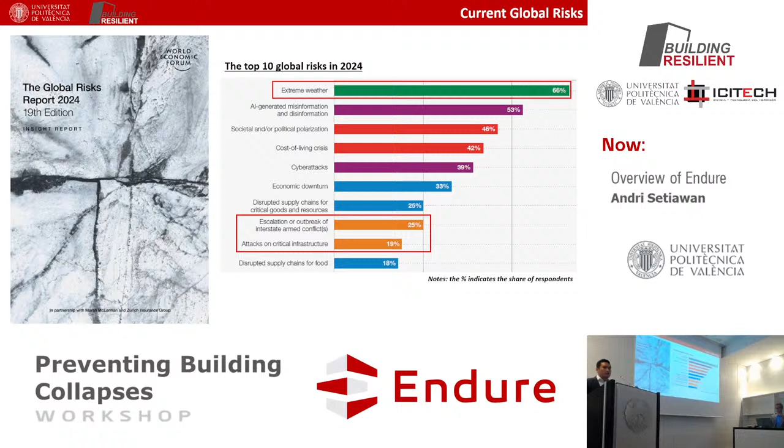So what I want to highlight is that when we speak about threat or hazards, it's just one side of the coin. The other side, which we usually overlook, is vulnerability. And this is mostly something we can do something about as engineers and researchers.

I usually don't pay much attention to media or news because sometimes they are misleading or a bit biased. But I want to show you two headlines that I fully agree with.

This one is from Huffington Post, written in 2016. It says that natural disasters cause way more deaths in poor countries than rich ones. This indicates that vulnerabilities play a crucial role.

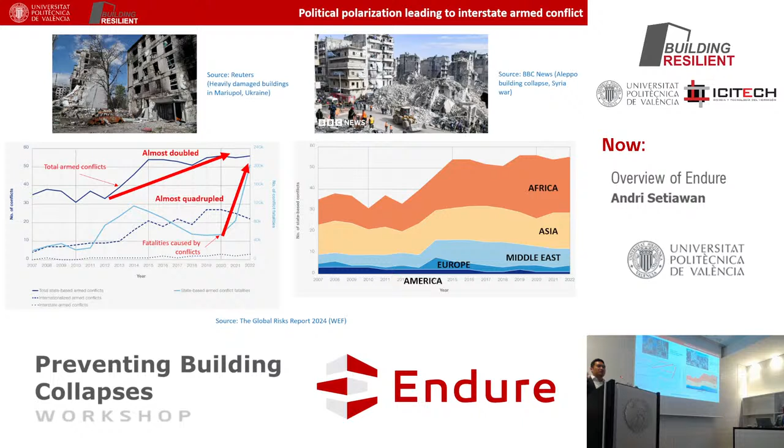There are many issues with aging infrastructure that may lead to building collapse as well, including reinforcement corrosion and also cracking and spalling of concrete, which we need to take into account in our problem.

Now I'm going to move on to speak in more technical terms about building collapses, some events that happened in the past, and what we can learn from them.

Starting from Ronan Point apartment, I think this is the most important event in robustness design, happening in 1968 in the UK. There was a blast on the 18th floor of the building that caused the partial collapse of the whole corner bay of the apartment building. This was the first event that triggered the development of official formulation of robustness building codes.

Then followed by another big incident, unfortunately in Seoul: the Sampoong department store collapsed, causing more than 500 casualties and injuring more than 1,000 people. Until today, Sampoong department store is still the deadliest non-war-related disaster in South Korea, and also the second deadliest in the world after the Rana Plaza collapse.

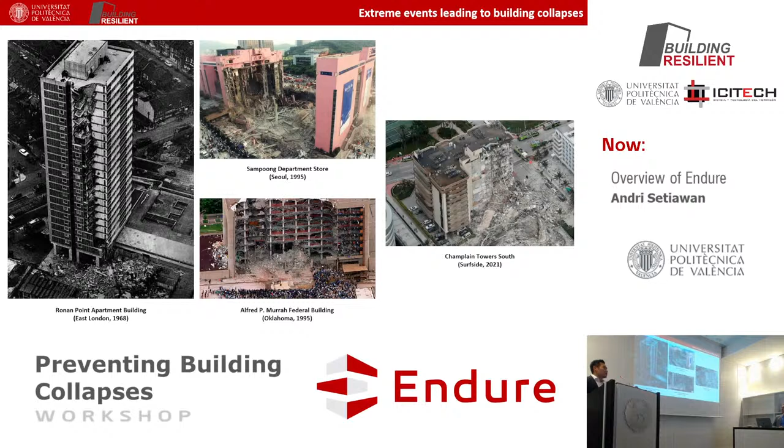So after seeing this collapse, we are going to discuss in more detail about what happened to this building. And I think the best way to do it is to describe what is progressive collapse.

There are many different definitions of progressive collapse, but I'm selecting one today, which is from the GSA. It says that progressive collapse is a situation where a local failure of a primary component leads to the collapse of adjoining members, which in turn leads to more collapse. And then the total damage is disproportionate when compared to the origin.

There are three keywords that I want to highlight, which I think emphasize what progressive collapse is. First is that most progressive collapse happens due to local failure. This local failure can be triggered by many different things, such as explosion, fire, or vehicle collision.

This local failure leads to the propagation of additional collapse in the surrounding system, leading to what we usually call a chain reaction or a domino effect. And the resulting collapse is disproportionate when compared to its origin.

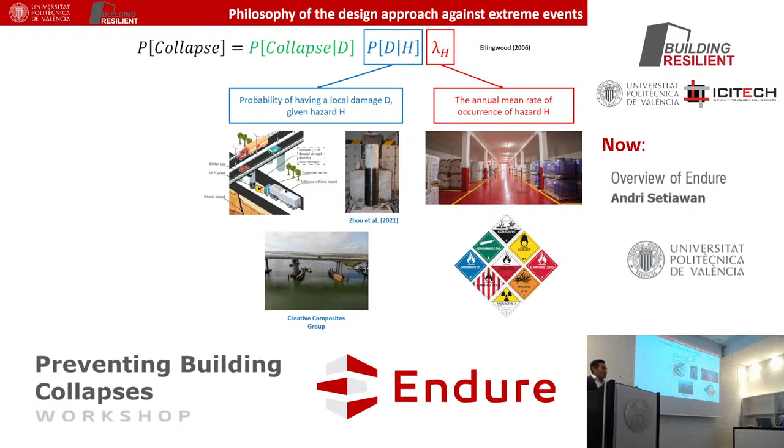But then, if this local damage happens and we cannot prevent it, we move on to the last component, which is the propagation of collapse - the probability of having this disproportional collapse given the local damage happens. For this, we mostly rely on the redistribution of the system, how different alternative load paths can be developed to redistribute the loads from the failed components to the surrounding system, so that we can achieve a new equilibrium without having partial collapse.

So this philosophy is applied to building codes. And how do we apply this? Let's see first by the evolution of codes.

The first official codes of practice were written in 1972, just 4 years after the Ronan Point collapse. This code has been developed, adopted, and modified into many different codes all around the world - Eurocode, GSA, and UFC in the US, and also the most recent one, ASCE 76. And we are also expecting the second generation of Eurocodes; I think it will be published in 2025.

If we extract the main essence of all these codes on how to deal with design for robustness, we have three main approaches.

First is the key elements. This one deals with prevention or minimizing the local damage. So we can have a column that is bigger or stronger, or putting FRP or jacketing, basically to make sure that if some hazard happens, our main critical components, mainly the vertical load-bearing elements, can still survive this hazard.

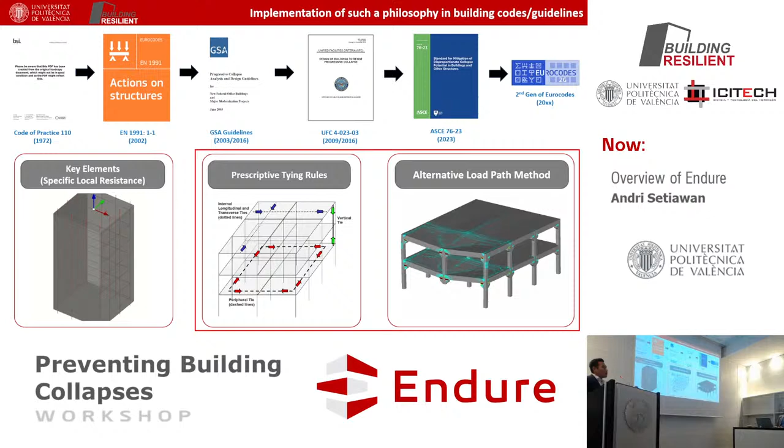But then, when can continuity actually backfire? There are some scenarios that show this. The first one is if you have a local foundation settlement, for example, if you have an elongated building and there is a significant settlement only in one small area in the building, continuity can actually pull the rest of the system that was previously unaffected.

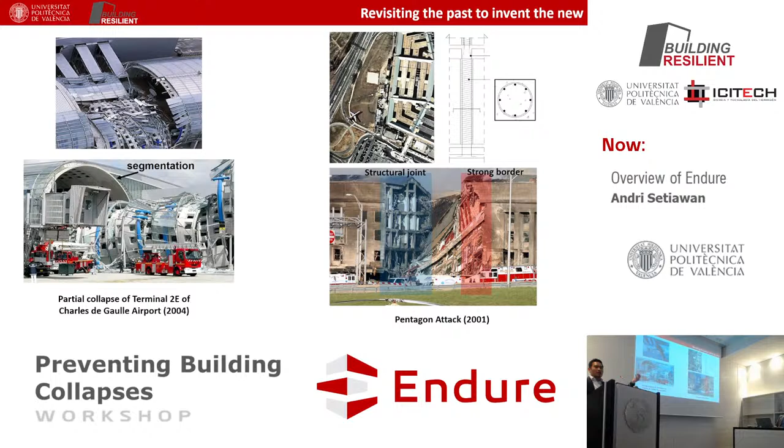So what we are trying to do in Endure is to invent a new philosophy where we combine the positive advantages of two main extremes: combining segmentation and combining continuity.

Why is this relevant? Because the way we design fuse-based segmentation, combining continuity and segmentation, is actually very similar to the way a lizard escapes predators.

There was a recent interesting study written in Science by Baban et al. They did a microscopic scan of the lizard tail, and instead of a single monolithic unit as we might think, the lizard tail is actually composed of segmented fracture planes that are deliberately designed to break.

So our fuse-based segmentation that we will apply in our buildings adopts a similar concept. We will have continuity, we will have the tail when there is no predator, no threat, and this will help ensure the building can function properly during service.

And if you have a small initial failure, we have continuity to deal with the distribution. But if there is a failure too large to withstand or contain through continuity, it will segment, isolating the collapse so it doesn't spread to the rest of the system. With this, we have what is called fuse-based segmentation, or scenario-based segmentation — we only form segmentation when it's needed.

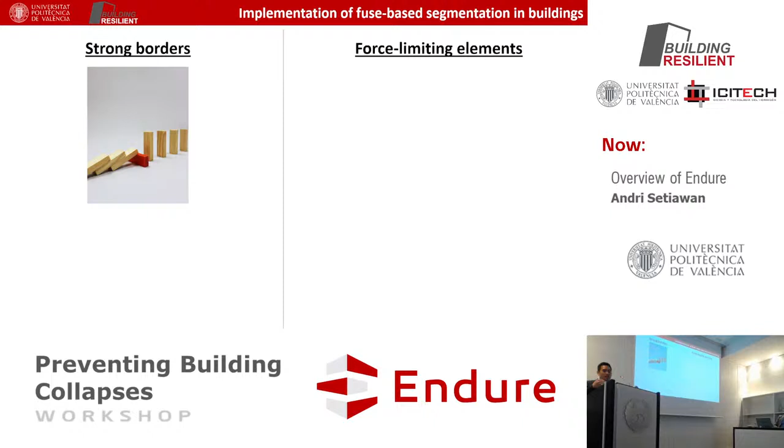Strong border is probably the most straightforward one. We've seen how it works perfectly during the Pentagon attack. You can see the illustration here: when the collapse front propagates, we have strong elements, indicated by this red block, that withstand the collapse front so it doesn't propagate to the rest of the system.

How do we do this in a real building? This can be done with even conventional columns designed with a seismic requirement, like a special moment frame with ductility class high. Or we can take advantage of a core wall or shear wall in our system — instead of just using these walls to resist wind or earthquake, we can position them to segment the building if needed.

There are several methods that have been used for seismic design, but we found they also work relatively well for collapse. For example, in steel construction we have what's called a dog bone, or reduced beam section, where we cut the flange so we don't transfer high moment to the column.

This also helps during collapse, because the column survives better if there's no significant transfer of force from the beam. In concrete structures it's a bit more difficult to achieve, but we can have a plastic hinge relocation with special detailing — for example, protecting the joint from strain penetration happening at the plastic hinge.

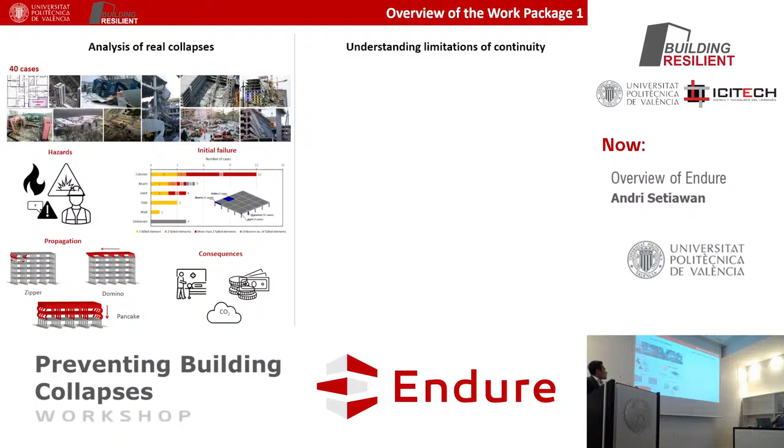From this analysis of real collapses, we develop several hypothetical building designs, taking understanding of when continuity can actually backfire, and investigate in more detail with different building configurations, different spans, different heights, and different initial damage scenarios to see when continuity can be ineffective. Because when continuity is ineffective, it means the building needs to be segmented.

So based on the analysis, we do the fuse-based segmentation configuration - basically we deal with the framework. The first question we ask in the design is whether this building needs segmentation or not, whether the building can be benefited from having segmentation.

If the answer is yes, then there is more framework we need to incorporate in the design process to determine where and when, and how we should segment the building, what would be the ideal or optimum segment size to contain the collapse effectively. The last step in work package 1, based on this framework, is to demonstrate the benefits of having segmentation compared to a building without segmentation.

Of course we have different collapse areas for the same initial failure, and we can quantify the consequences of these two scenarios so that we can convince stakeholders, building owners, and end users that having segmentation can save lives and save the monetary value of properties as well.

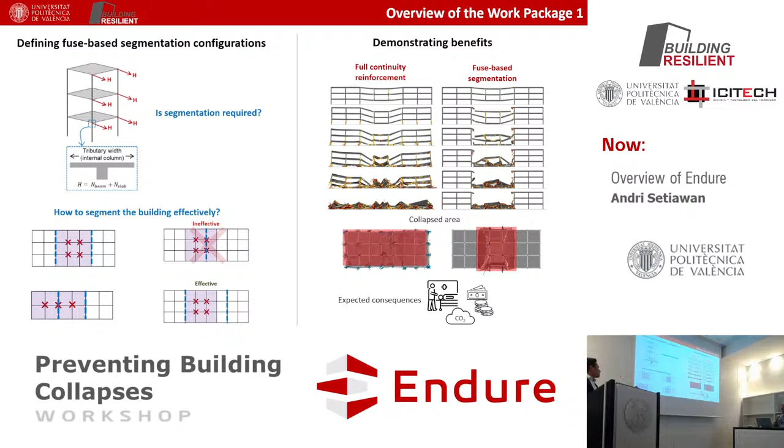And then in work package 2, there are two main activities we are currently working on. The first is designing the force limiting elements and doing some prototype testing to see how reliable they are and whether they can be manufactured precisely. To do this, we try not to reinvent the wheel - we try to adopt what's already in the industry and then make adjustments and modifications.

So in order to do that, we develop a multi-criteria analysis with 9 parameters covering different aspects that we consider, for example the reliability of the fuse, how durable the structural fuse is, and how compliant this fuse is to other load paths in the building, and so on.

Using these criteria, our team evaluated 26 potential fuse designs for reinforced concrete structures and another 22 for steel structures. These are just some examples we gathered from the literature. We can have precast connection systems, mechanical couplers, or pin connection systems that are quite common in steel construction, and also additional corrugated plates or reduced beam sections, for example.

For the reinforced concrete structures, according to this multi-criteria analysis that we performed, we evaluated mechanical coupler as the most, let's say, practical solution that we can achieve.

The interesting thing here is we want to do the opposite of what traditional coupler does. Traditional coupler is always designed to be stronger than the two bars connected to it. But since we want this mechanical coupler to behave like a fuse, we need to design it to be weaker, but not too weak so that it breaks under small failure, but not too strong so that it will propagate the collapse.

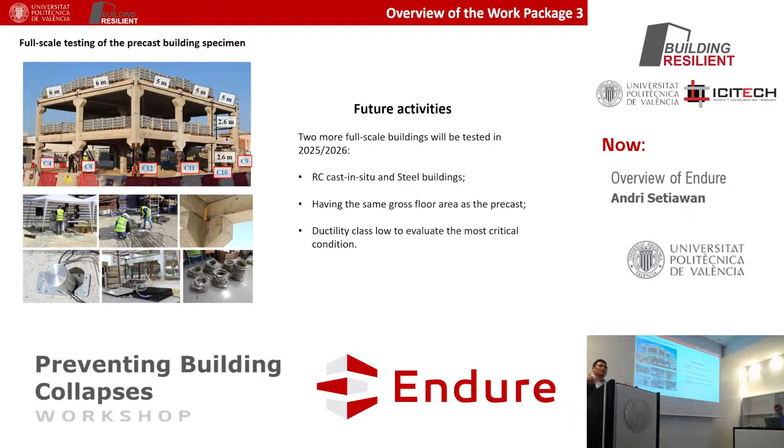Since the project is not yet finished, I will not make any conclusions or statements about it. I'm going to highlight the impacts that Endure can bring from its success. Scientifically, the success of Endure will open a new paradigm for next-gen robustness design. By no means to eliminate or substitute what has been done in the past, for example continuity, but the goal is to complement it, to provide the last line of defense in the building if other measures fail to do so.

Socially, this is the biggest goal of our project: to create a more resilient society, more resilient buildings, and to save lives from future collapse. And environmentally, with more robust buildings we can expect longer service life, which can help reduce carbon footprint, a big issue for our planet Earth.

So I'm going back to the first message that I was telling you: our world is at risk. This is probably inevitable, but we can create a resilient society so that hazards don't necessarily translate into disasters. Thank you very much for your attention, and I hope you enjoy the rest of the workshop. Thank you.

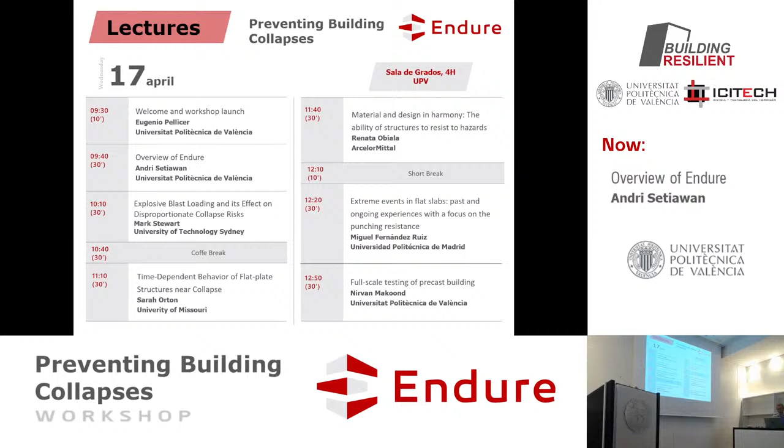Ready for the presentation? Yep. And thank you very much for coming to Valencia. 42 hours traveling by plane. Yeah, so truly appreciate your visit.

Okay, well I really have to thank Jose for getting me involved in this very fascinating project. We just heard from Andri about the scope and how innovative I think this is. I also have to thank Jose and his team for being such gracious hosts while I'm here. You've really shown me some good parts of Valencia. I'm looking forward to seeing some more. I'm really enjoying my time here. So thanks, Jose. How do I move?

Okay, so Andri actually gave a pretty good introduction to risk and risk assessment, which is really my interest. In the last 20 years or so I've been very interested in explosive blast loading and terrorism. But what I want to talk about today, the principles, methods, and philosophy, can be equally applied to seismic actions in terms of progressive collapse or other types of abnormal loading.

So the motivation for me is about risk, and obviously as engineers we like to think about numbers rather than just adjectives. Risk occurs in the spectrum between full certainty and complete uncertainty, so risk lies somewhere in the middle. It's really about the likelihood of the hazard or threat as a product of the vulnerability of the infrastructure we're looking at, and then the consequences, in terms of lives lost, economic losses, or other social or indirect losses on top of that.

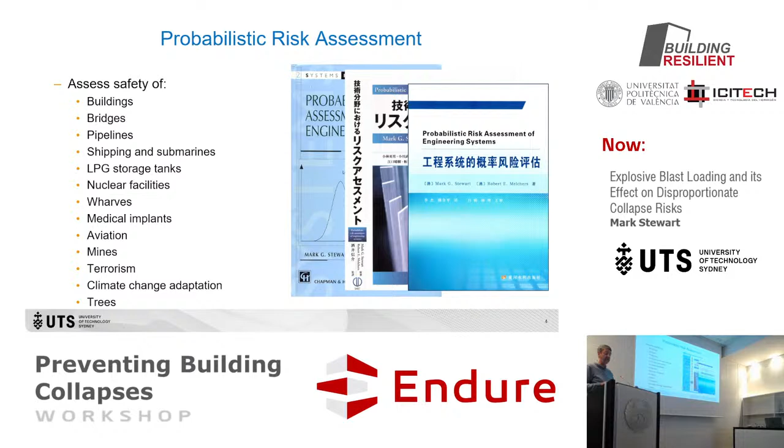And it's really about low probability, high consequence events. So it's really extreme events, right? And that's where decision making is really difficult to tease out. Just what's the best thing to do?

So we'll talk about terrorism, and most of you know what's going on. I'm really interested in some improvised explosive devices that can be homemade, at least in Western countries. We're lucky that most of the attacks in the West are lone wolves or self-starters, so most of them don't actually succeed - it's quite rare to have a successful car bomb or IED attack in the West. I've been mainly focused on vehicle attacks because several tons of explosives is what's going to really damage buildings and other infrastructure. But there's other threats.

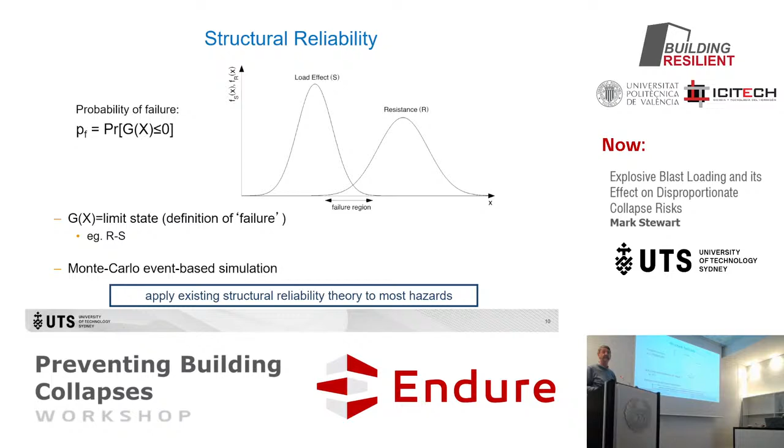Extensive glazing damage. And what we really focus on is the loading side, the air blast variability, and also the structural response side. So you need to look at both sides of the equation here.

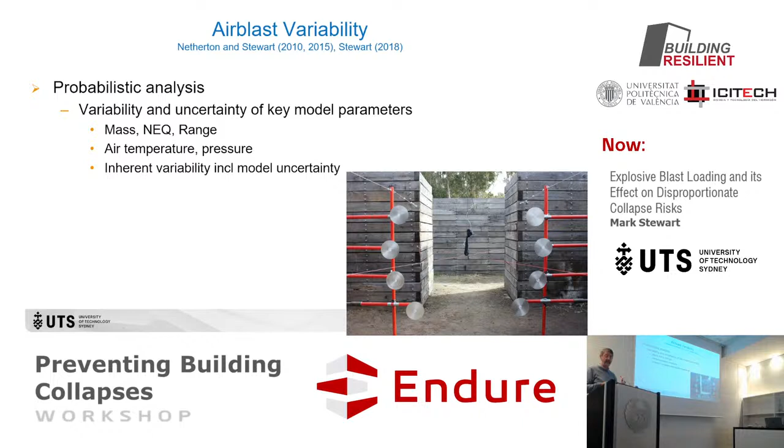Now, theoretically, you should get exactly the same pressure at every gauge. But we don't, right? We see that there's some variability. And so we did more than 90 tests over several years. That's sort of what we get. It's fairly small scale within a bunker.

And triggers for collapse - I already talked about the innovation for that, so I don't need to talk too much about that.

This is a sort of illustrative example. It's a little bit realistic, but not that realistic, in the sense that it's just something we can do in like 6 months. We said, okay, let's look at a reinforced concrete building. Let's assume it's 10 stories high. Let's say the footprint is really just 5 columns across. We're only considering the axial load of the column as the main failing mechanism. We haven't modeled this as a structural system - we just modeled this as a column with a load on it.

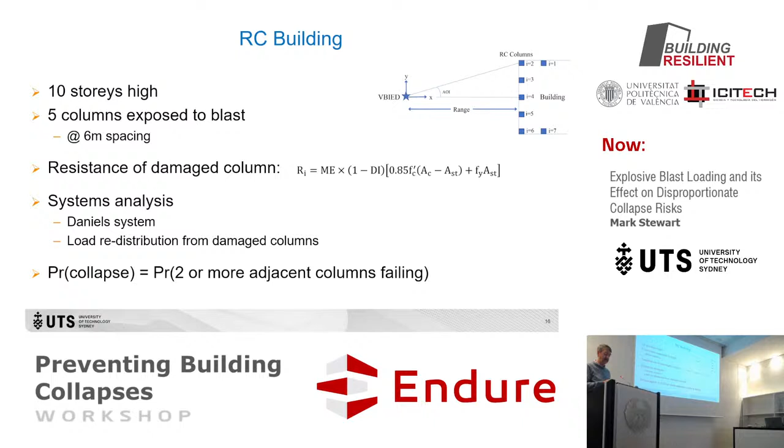And there's uncertainties, right? So you might have 1,000 kilograms of ANFO, ammonium nitrate fuel oil, which can be homemade and mixed. Let's assume it's 1,000 kilograms. Let's assume that when the terrorists make it, they might aim for 1,000 kilograms, but it might actually be a bit less - maybe 950 or maybe 1,050. So there's some variability in that, which we call the coefficient of variation, the standard deviation divided by the mean.

So that uncertainty is quite narrow. Bigger uncertainty is how you mix it. ANFO has to be mixed really carefully to get the full energetic property. If it's mixed perfectly, it's going to be equivalent of about 0.8 compared to TNT - so 80% of the charge or effect of TNT. TNT is always seen as the reference here. But if it's made poorly, it can have 0 TNT equivalent - it's just a dud, a fizzer.

One example was the so-called Times Square bomb.

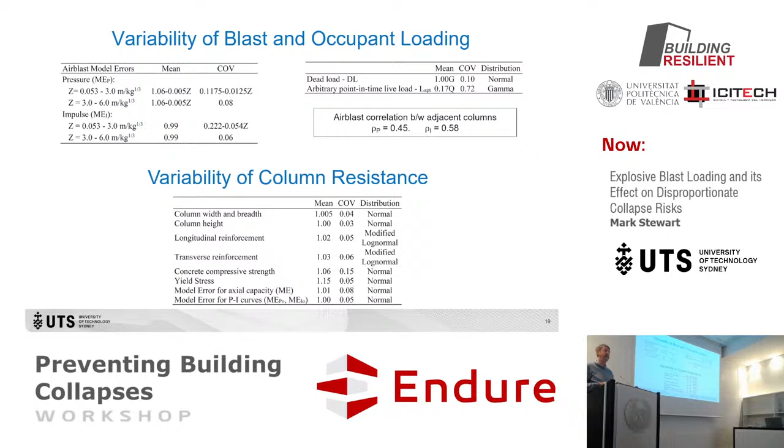So this is a case where the design values for loadings for blast tend to be not conservative, because they're really scenario based. For natural hazards - live loads, wind, seismic, snow, and everything else - the design code loads are normally conservative. But the main thing here is that there's a large variability in our loading side of the problem, as well as on the resistance side.

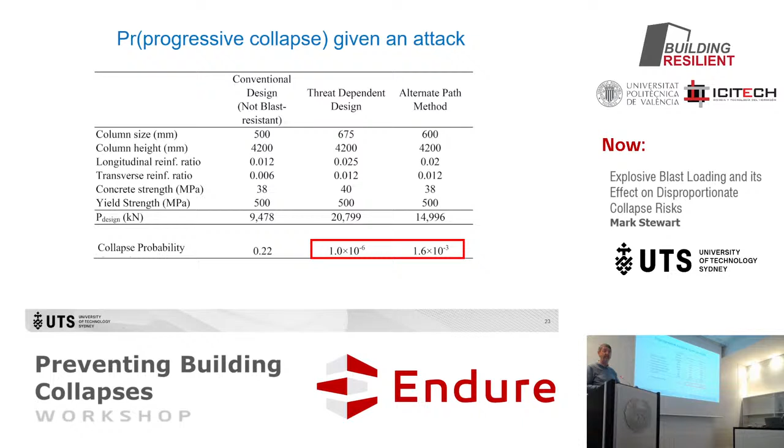If you design for it to be blast resistant, then the probabilities become very, very low, which is what you would hope to see. So the risk reduction is greater than 99%. Blast resistant design is very effective. You're getting nearly 100% reduction in risk. But there's a cost because you need to have much larger structural members.

In most cases you think, well, these numbers are pretty low. This is assuming that you do have an attack, and the attack itself is going to be relatively unlikely. So then the question is, well, these numbers are great, what can they tell us? How do we balance risk versus cost?

And the key question is, what's the likelihood of a terrorist attack occurring on that particular building? And the key question is, are these risks acceptable? Are these something we can live with, or are they things we need to actually mitigate?

So the question is, how safe are we? This is a fairly simple approach, but it illustrates the point. We can assume that the probability of the hazard, the probability that there's a successful attack, might be 1 by 10 to the -4.

And that's per building per year. So you might think there could be an attack somewhere in your country, but to think about exactly which building that is going to be becomes a very low number because there are so many targets. So it depends on what threat advice you are receiving.

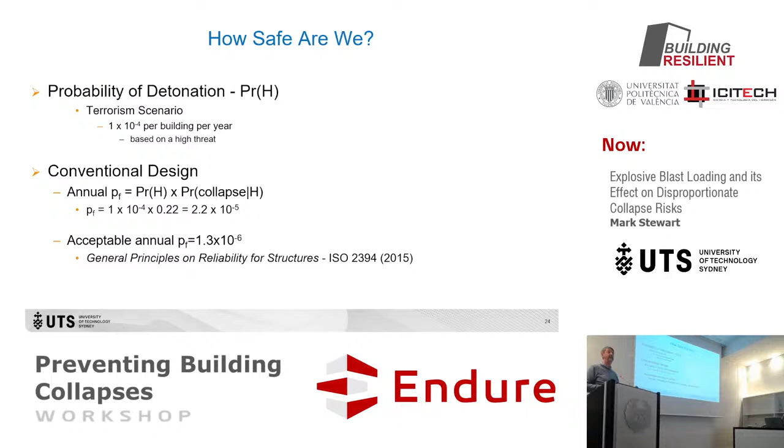So in this example, you'd say, well, actually the conventional design is unsafe. The probability of failure is pretty low, but it doesn't meet the target reliability. And that's the basis for performance-based design, to make sure reliability matches a target or actually exceeds our target.

But obviously, you can do a lot more detail in the analysis. It just shows the information we need to work out whether the risks are acceptable and how safe we are.

And so if you want, you can then go on and do a cost benefit analysis, because at the end of the day, most decisions are made by either government or by owners of infrastructure, and cost is really important to them. They need to see that what they're doing is cost effective.

That reduction in risk gives us our benefit. Let's say we reduce the risk by 99%. That means the benefit is really that we're saving in terms of lives lost—those lives lost will be reduced by 99%, and the damages will be reduced by 99%. So that's the benefit, and you compare that with the cost. Now, obviously, in reality, it's a lot more complicated, with time effects, spatial effects, discounting and so on, but these are the basic principles.

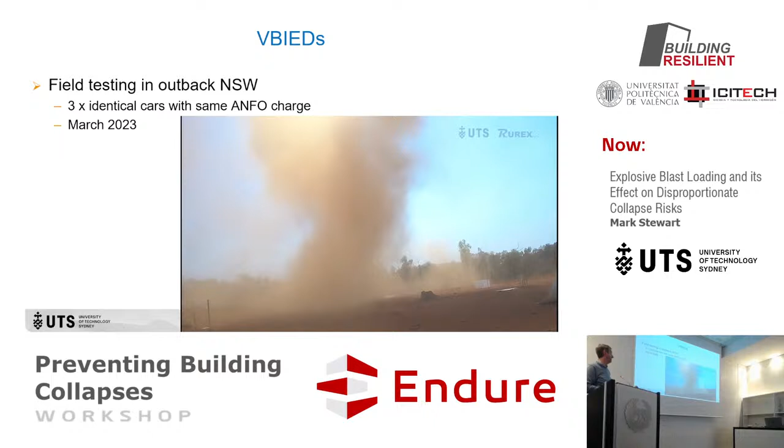We did this in the outback, 800 kilometres from Sydney. The town we stayed at had 12 people—a little village with a pub. We got to meet all the locals. While we were there, there was a bushfire, and we lost power for a couple of days. I almost hit a kangaroo on the road. It was a pretty adventurous week.

You can see the range here—I always like this tire, it just goes flying up there. Even though this was in March, it was really hot, like 40-degree, 45-degree days every day. And you can see that it's quite impressive that the facility is so close, about 30 or 40 kilometres away.

Because it was in such a remote location, we had to take 5 tons of equipment with us—2 cars, 2 trailers. You're 150 kilometres from the nearest decent-sized town, so if you don't have it on the day, you just can't get it. We're still analysing the data. To give you a sense of distance, that's about 350 metres across, and some fragments ended up over here, 400 or 500 metres away.

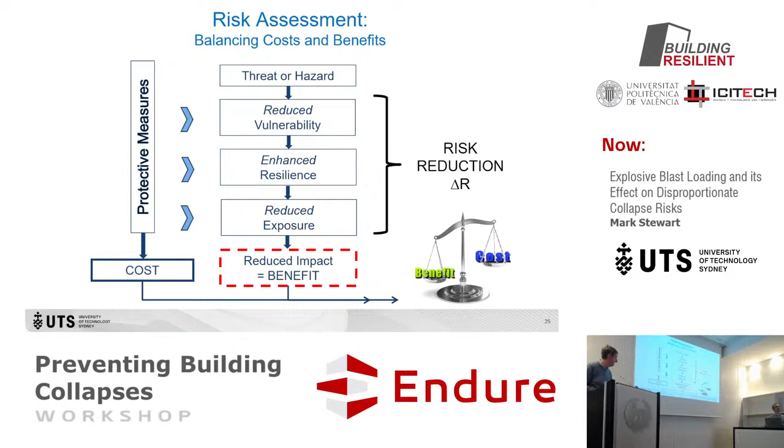Very interesting—I'm not at all an expert in terrorist attacks, so I got a question. I think it was in slide 24. Just curiosity, before just some... yeah, here.

Here we're speaking of an acceptable annual probability figure of something to the power -6, but I don't know if this is related also to terrorist attack. Normally we're speaking about 10 to the power -4 as a general value. So when I was seeing the figures, I was thinking it's difficult to say a conventional design is unsafe, really, because in the terrorism scenario you introduced the probability, perhaps you could also say what is safe and then inform the owner what probability you can manage for a terrorist attack.

So to do it inverse, to say okay, you could have 1 bomb you can spend every 3 years - is this acceptable for you or not? Instead of saying this is not compliant. We have a very difficult number to calculate the probability of detonation. I don't know if you had thoughts on that.

Yeah, no, I fully agree. I just do this as a very simple equation. I'm going to do this for industry, or I could hold an hour talking about this. But yeah, you're dead right. That's why I said it depends on the threat scenario. It depends on - I didn't show the table, but ISO 2394 has a table with consequences versus the cost of safety measures, and you can see where you think you are on that table. So here I chose catastrophic consequences, which raises the bar much higher.

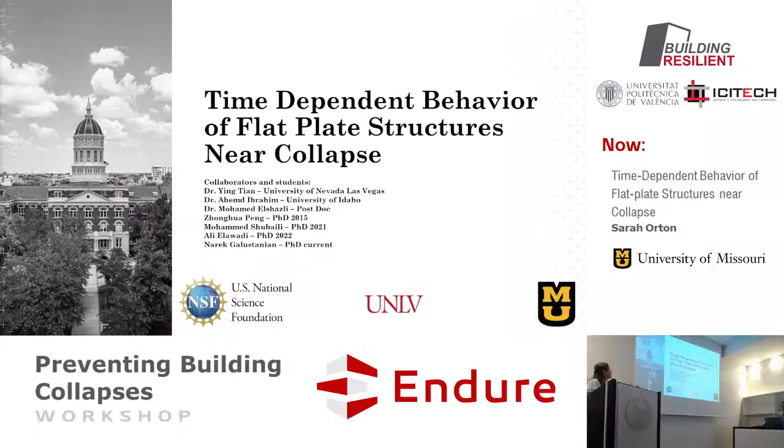There we go. So I'm actually presenting three projects. One started back in 2012, dynamic response of flat plate structures - I'm just going to give a very brief overview of that. I'll spend most of my time looking at time-dependent response under sustained loading, so you load it up and then see what happens. And then this last one, which I just got funded earlier this year, is the impact of falling structural debris. So far that's my talk here. For the dynamic response of flat plate structures, I tested 0.4 scale structures under sudden column removal.

So you can see the idea with the structure here. We have a little segment cut out, and this is the structure. It's about 20 feet, which I'm not good at converting to meters, but it's big - about the width of this room. And then the columns, I have 9 columns throughout here that we then tested.

Not going into a lot of details on this, there's papers about it, so you can watch the papers, but you can't watch videos in papers, so I brought videos. We did 2 different column removals. This one was the exterior column removal, so we're removing this column right here. There's a little jack that's going to collapse, and it will drop. The applied load was about 10 kilonewtons per meter squared. The intact capacity, if you had the column, would be about 22. So you're about half of what the building would be able to withstand if it was fully intact.

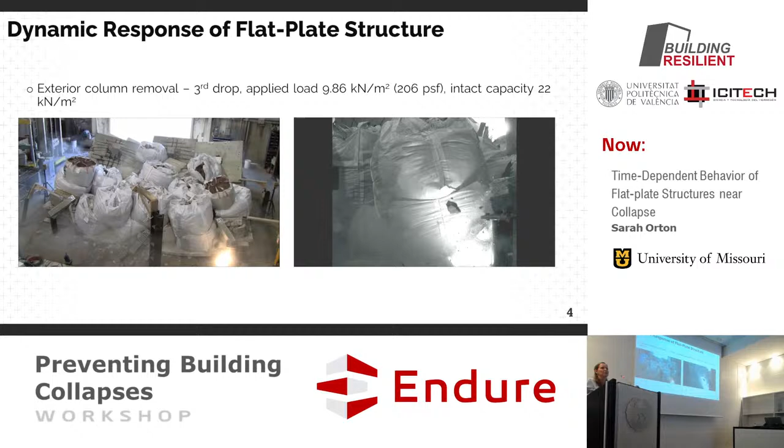And of course, that's what it looked like after we moved all of our extra weight. Very common punching shear failure. And Dwayne talked about this in department stores - the idea of these columns sticking up and they're just kind of left there and then they fall over on top. Very common. Did another test, completely different structure.

This one, we're removing the interior column, this one right here. So here is the slab, there's weight on it. This frame out here is just to hold a string pot going to the middle. And these other beams is the other researcher doing tests that put it in a way so we didn't get a good video. But watch this video.

I had them all timed at the same time almost. So this deflected and the neighboring columns punched. The columns that were to the side, front and back, they all experienced punching shear failure. But the after-punching response, the post-punching capacity, was enough to stop the complete collapse. I think if I had just a little more weight, it would have gone completely through. A little bit less, I wouldn't have had punching failures. So it's like this little sweet spot right there.

This load was only 5.5 kilonewtons per meter squared, which corresponds approximately to 1 times dead load plus 0.5 live load. And as Mark said in most of his presentation, the live load is actually a lot less than what you designed for. So maybe it would have survived if it was a real structure, maybe not.

So overall conclusions here: for the exterior column collapse, you had to have about 40% - the strength was about 40% of the intact capacity. For the interior, a little bit more controlling there, 34% of the intact capacity. We also found that the dynamic amplification factor was about 1.15.

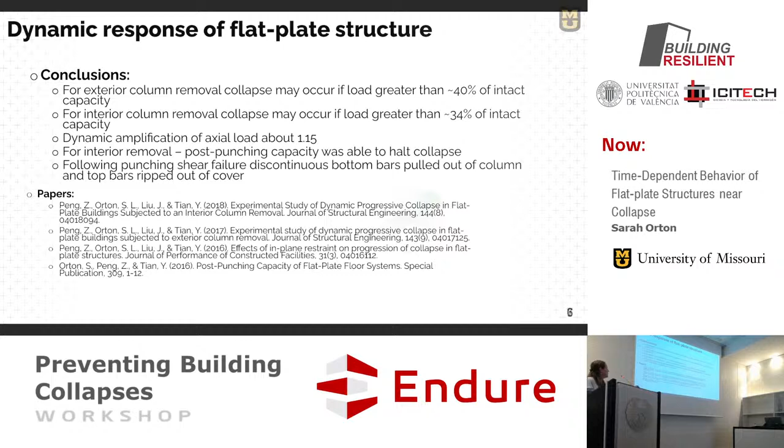Like I said, I was going to introduce this only briefly. There are several papers about it, so if you want to read more, you can always read the papers. The next project I'll go into more detail on is the time-dependent collapse behavior of flat plate structures.

This is a project I just finished about 2 years ago. I'm still writing the last couple papers about it, so it's similar in publication status. It involved this idea that if you have a structure under some sort of sustained load, just sitting out there under gravity load, and there's some damage in it—deterioration, somebody didn't design it right, whatever the cause—how does a sustained load affect the capacity of that structure?

So we started out with some concrete material tests. We did some bond tests, did some modeling, and tests of slab column connections, and then a couple system level behavior models. I'll start out with concrete material.

Concrete experiences creep. Under sustained load, you can define essentially 3 stages of creep: one in which the rate of strain decreases, the primary creep; another in which it's almost constant; and a third in which it can have a sudden increase until failure. Most concrete materials—some sources say 80%, some say 70%—if you load it up to a high level and leave it there, the concrete will fail over time.

A lot of this research was done very early by Rusch, and then our colleague here, Manuel, did some very nice work with his group recently, which we took and realized worked very nicely. So I didn't have to reconstruct anything.

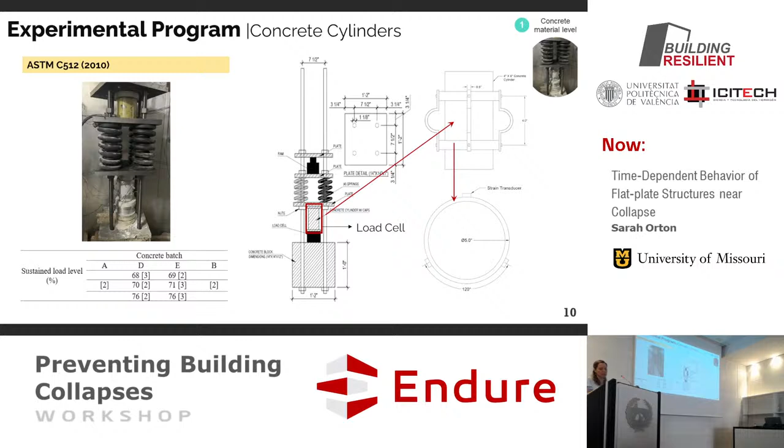So we did some of our own compression tests. There's a cylinder in here, we put on some strain gauges to amplify the strain, put it under some nice big thick springs to create a sustained load, and ran the tests.

For our cylinders, what we saw is if we had a sustained load greater than about 71%, we reached failure. These were the same concrete I was using in my test structure—a scaled concrete, so the aggregate size is about half the normal aggregate size, and that may be why it was a little bit less.

You can see this test here at 68% didn't reach failure. This one at 70% didn't reach failure. This one at 76% reached failure. And this one at 71% reached failure.

So knowing the concrete material, the other question was, what about the bond? Reinforcement relies on the bond to the concrete in order to share the load. So is that going to affect the behavior?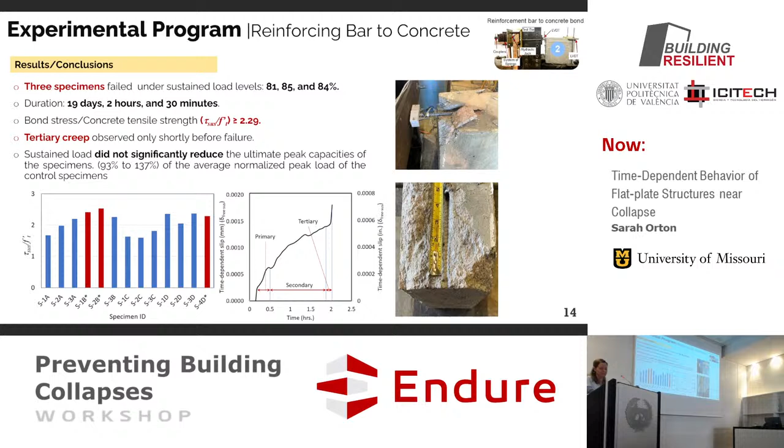So sustained failure level occurring around 81%. Another thing that's interesting is the additional free end slip was about 124% of the initial slip. So you load it and it moves some, and then over time it moves that much again and a little bit more.

So that is part of what causes increasing deflection in our reinforced concrete structures, a slip between the reinforcement and the concrete through the bond. With all that information, we can do some material modeling.

We developed a user-defined material in ANSYS, and my PhD student developed it. I was mostly out of it at that stage. We did 4 different stages, looked at the smeared concrete model, and looked at viscoelastic behavior under sustained loads.

To do the nonlinear creep strain effect, we used previous research, and it worked out really well. For our bond model, we based it on some previous research and then applied it to our own data, did some failure criterion, applied a hardening rule, and applied a plastic flow rule.

For the bond model, we took some existing bond models, looked at our data, and were able to fit an equation. These coefficients, 4.85 and 7.41, came from the best fit from our equation, and that allowed us to predict the bond slip.

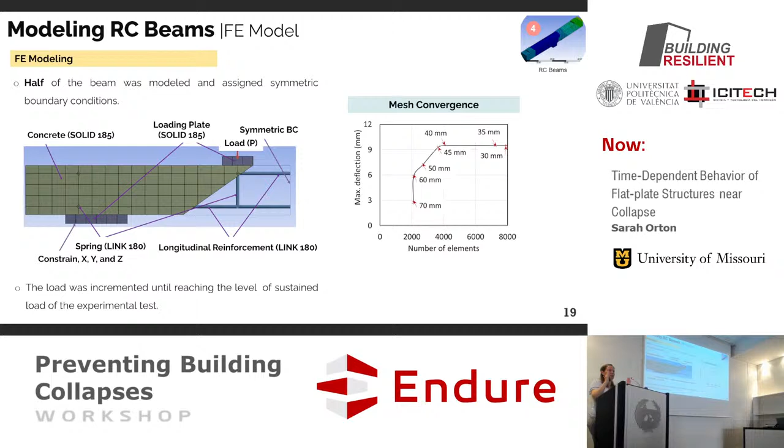So we did models of some reinforced concrete beams. I'm not showing those tests here, but I have a paper out about the beam tests, about 4-foot long beams, roughly that cross section. We modeled those beams, compared it to the experimental data, and the differences are fairly acceptable for this type of work, especially under sustained load.

Then we also looked at the strain and the time to failure, and got pretty decent results.

One thing I thought was interesting: we looked at a particular test where one model considered the bond model, and another model here didn't apply the bond slip effect. You can see a very different increase in the creep deflections with time. So just applying that slipping in the model, at least in these beam results, helped us get the model results to match the experimental data a lot better.

Last set of tests we did was these isolated slab column specimens. You have your reinforced concrete slab here, and then you have the column in the center. The slab was about 3.5 inches, 89 millimeters. Just typical reinforcement, nothing really too special about it.

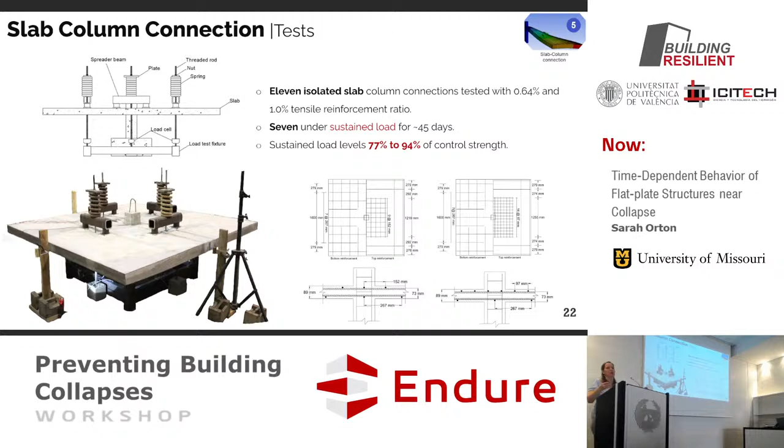It did extend beyond the inflection point. This is where the inflection point would be in the real structure, and I extended it beyond it so that you could include any compressive membrane effect that would be used in the slab as well.

These tests, again, we're putting under sustained load. Most of the tests did not fail under the first sustained loading period. So we'll load it up. This one was to 89 kilonewtons and leave it under the load for almost 45 days. Then if it didn't fail, we put a little more load on and leave it under the load for 3 days. And if it didn't fail, you put a little more load on, just kind of incrementally approaching that to see when we could get that sustained load failure.

Most of them didn't fail under the initial loading. This one did, though. It only took 20 minutes. We loaded it up, and 20 minutes later it failed. And this last one, we put it on the loading for about 30 days. So we reloaded it, and it failed very soon after.

So it's very hard to get the level of loading, but the capacities - it was able to hold the sustained load for about 3 days within about 5% of the capacity. I had to get really, really close, inching up on that capacity in order to get that failure to happen. We looked at the bond in the concrete, and they were at 70-80% of the capacity. With the reinforcement acting in there, you can get really close to the actual capacity. So it's reassuring for our structures that they have that ability.

So these are some of the tests. These are the ones at a 0.64 reinforcement ratio. Nice behavior here - this black one was the control test, and the blue and red ones are the sustained loading tests. It's really hard to tell the difference. I have some boxes in here where it's under sustained load. There's definitely increases in deflection under sustained load, but when we loaded it, behavior is pretty much matching the control test.

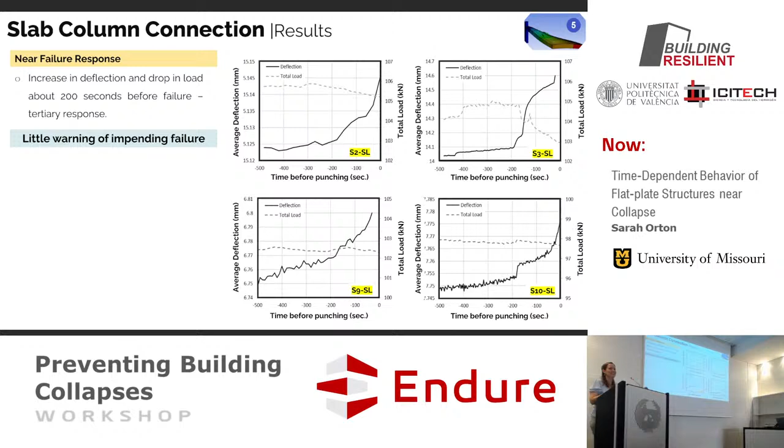Another thing we looked at is whether there's any warning of impending failure. These are examples from some of the tests. About 200 seconds before failure, I can see there's an increase in deflection, a little bit of a drop in the load - not a lot of drop, but there's definitely increases in deflection. But you're talking about 100 to 200 seconds, it's not a lot of warning. There's not going to be time for someone to say 'oh, I think this is about to fail, let's go talk to the structural engineer and see what he feels.' No, it's going to go pretty quick.

So this is a video - this was the test that failed in 20 minutes. We were loading it and watching it, and we noticed it was really soft. Every time we put on load, it just kind of went away. We thought this test was going to fail pretty soon, so we were able to record it.

And so let's see, we can watch it here. We loaded it by just tightening these nuts here. And we're like, okay, wait, we think it's going to fail.

And then it made me jump, but that was the failure. You couldn't see anything going on. The only reason why we knew it was about to fail was that the load kept dropping off. It was like, this is indicating that it's about ready to go. And then it just went on its own.

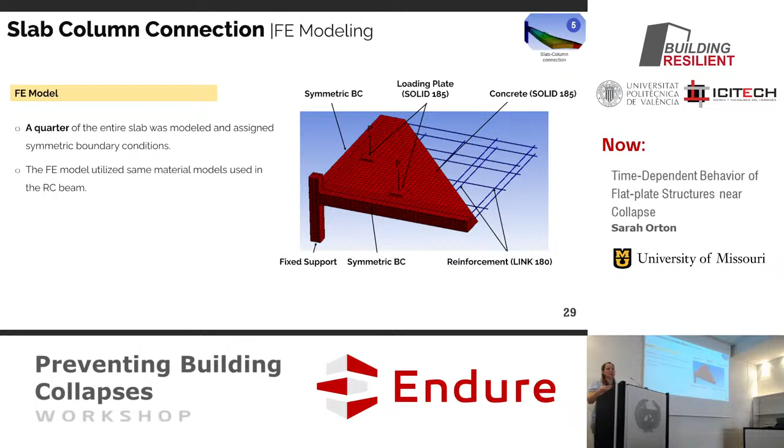Did modeling of it, of course, using the ANSYS model, used the same configuration of the model that we did in the beam test. We tested it out in the beam test, applied the same theories and ideas to our slab test, and we're able to get really good results. We didn't have to modify the model or do lots of changes to match the data.

Once we got it set with the beam tests, it worked out really well. Some differences, one's about 12% there. But overall, for a model of something moving under sustained load, I think we got some pretty good agreement.

Did some parametric studies to see the influence of concrete strength—not a big influence. Increasing the load level can increase the deflection, but it's not a huge increase. Increasing the concrete cover can decrease the deflection, but it's not huge either.

We saw that we would get failure if we had a load level of about 94% or above. If we had lower load levels, it wouldn't eventually fail with time. So 94% is a lot of the structural capacity—way more than you would ever put on a realistic structure. You want some safety factor in there, but it's really hard to get that load level just right to cause failure.

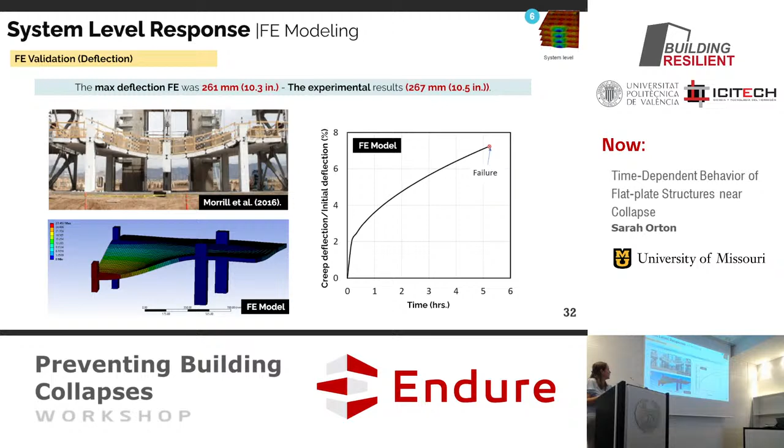So what I learned in this test is: concrete itself, the material, experienced failure at about 70%. Concrete is susceptible to creep deformations and failure. When I look at the bond, I had about 84% of the capacity, and I had a lot of slip in that bond. So when I did my models, I needed to apply that bond slip model—that worked out a lot better.

For something like a slab column connection, when you add reinforcement, the reinforcement does a great job of taking up the load that the concrete's losing under creep. So you get up to about 95% of the capacity before you get sustained load failure, which makes me feel a whole lot safer. Most structures have reinforcement, and it's going to be there to help take care of things.

Increase in deflections—definitely a lot of increase in deflections. So this is the idea of monitoring the structure; they always monitor deflections, and there is increase in deflections. It's not as much as the bond, 23% initial, but you can definitely see increases. But the impending failure, when it's just increasing and about ready to go, there's very little warning. You have a very short time window, which would be a problem if somebody's just sitting there monitoring it. It's like, when do we actually have to leave? Once you're worried about it, you should go.

And then lots of papers about this—some have been published. One has just come out in Structures, and that's the one on slab tests. These other two relate to it numerically; I'll get those out. My PhD student graduated without publishing his papers, which I probably shouldn't have let him do. So all your PhD students out there, make sure you publish before you leave, because trying to get you done afterwards is difficult.

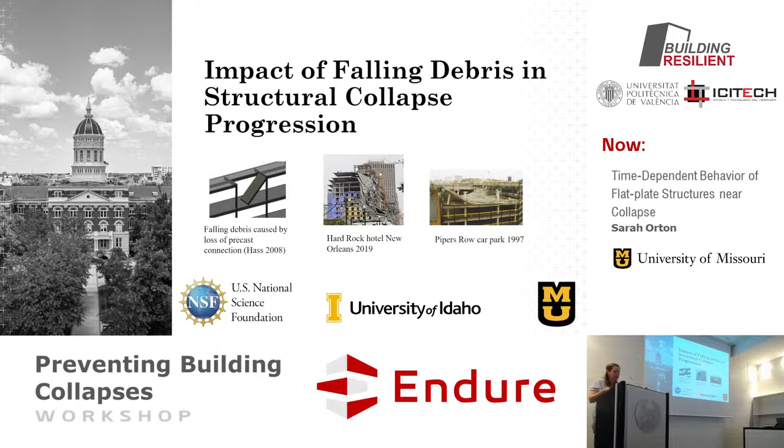Like I said, this one just started. We don't really have any results, but if anybody out there has ideas, I'd be happy to learn about them. We want to prevent collapses, and we've set it up as a series of 5 tasks, so I have some more slides on that.

The main fundamental question I was looking at here is: if you have something that is going to fall, what's the velocity, shape, and condition of the impacting mass? Most of the time when you look at falling debris, you're assuming it's falling at free fall through the entire story height.

But just like the flat slab test I showed you in that slow-mo video, it's not at free fall - you have to lose the connections, and that slows it down. It's not flat, it's falling at an angle, so the impact is not all at once. It's more gradual, and the slab itself might be damaged as well.

If you have, for example, a drop of water hitting something versus a drop of ice, the water is going to impart a lot less impact energy because it can distribute. The ice is going to hit a lot harder. Most impact tests are done with steel impactors, which don't have much ability to distribute.

So let's look at that. The other question is how much energy is lost on impact. Usually impact is bounded between rigid - think of billiard balls, really hard balls hitting each other, they bounce off - versus plastic impact, something really soft that hits and sticks together. There are two different bounds of that. Well, where is concrete in between?

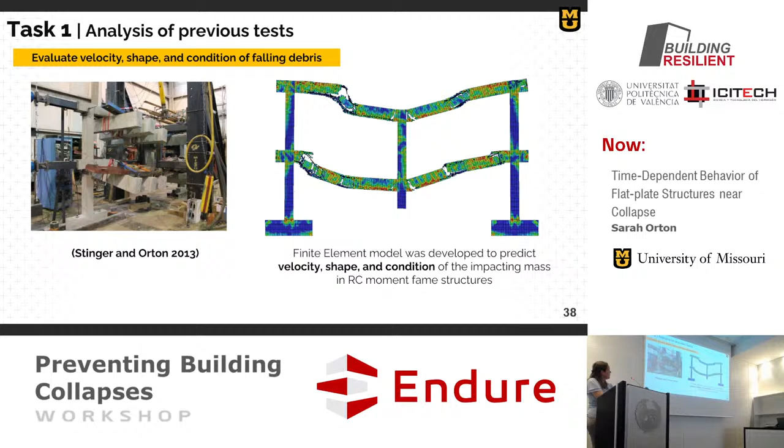So we've been doing some preliminary studies - took a frame test I did earlier. This is just a frame here. We pulled out the column, and you can see it fell, with lots of clanging sounds.

We made some models of that, and the experimental velocity was only 70 inches per second right before the catenary action took in. The FEM model said it'd be about 42. If you assume free falling, it's about 123. So that shows the velocity, the speed at which it's going, is much less than a free fall velocity - you can see the difference between the actual velocity and free fall.

This is where the velocity started to slow down because it caught itself in catenary action. But still, there's definitely a difference between what the frame was experiencing and what the current assumption is. So can we do better with our analysis?

We also looked at the shape - in the model, if you assume uniform impact, everything hitting at the same time, versus something hitting at an angle. If you assume it's at 45 degrees, then you have 39% of the impact force compared to something hitting all at the same time. So again, this is something that is perhaps overly conservative in how we design things now.

Maybe we can get some more accurate numbers for some testing. One part of this test is we're going to analyze some drop beam experiments. We're going to have a beam hanging up here that's going to impact this beam. It's going to be done at different angles, different concrete strengths, different velocities, and we're currently trying to figure out how to design this test setup.

So it's a nice little sketch. I have no idea how it's actually going to work. But if you have any suggestions, let me know.

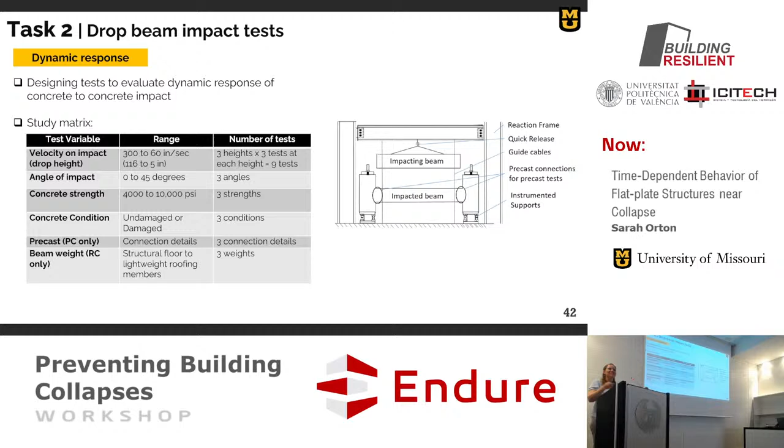Going to do some FEM analysis. We can't do all the tests, so we can analyze more velocities, more impact strengths, concrete strengths, different types of precast connections. Once we get the model up and running, then you can do a lot more analyses.

And then we're going to use the applied element method to examine some prototype cases. So we have some knowledge from our FEM models from LS Dyna, and then prototype cases, flat plate, precast, and then modifying it to like, maybe it's a light roof construction versus something that's heavy.

And then hopefully once we do all that, analyze the results and come out with some sort of simplified methodology that I can say, well, if you're analyzing collapse for a flat plate structure, the velocity should be this percentage and the impact energy should be around this. Something engineers could use to help them check for falling debris impact.

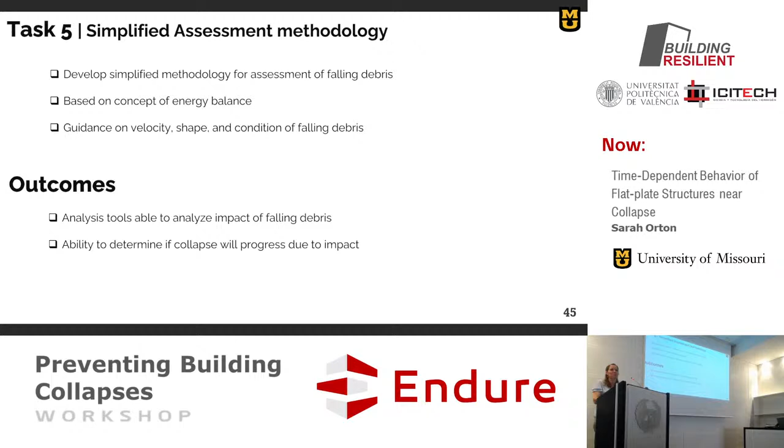So good analysis tools, and that's going to give us the ability to determine if the collapse is going to progress due to impact. So if that interests you, let me know. As we proceed with the research, there'll be more papers about it. My PhD student will publish the papers before he graduates. And so that's upcoming. And that's all I have.

Sarah, thank you very much for your presentation. Also, you see, for PhD students, it's important to finish the work before leaving the university. So that's a key aspect.

So we have time for questions or even suggestions for your test. Any questions from the audience? Or even a suggestion for the next experimental campaign? If you don't want to talk in the room, you can find me later and ask questions. It's fine, questions in the other break, okay? So thank you very much, Sarah, again. Well, thank you.

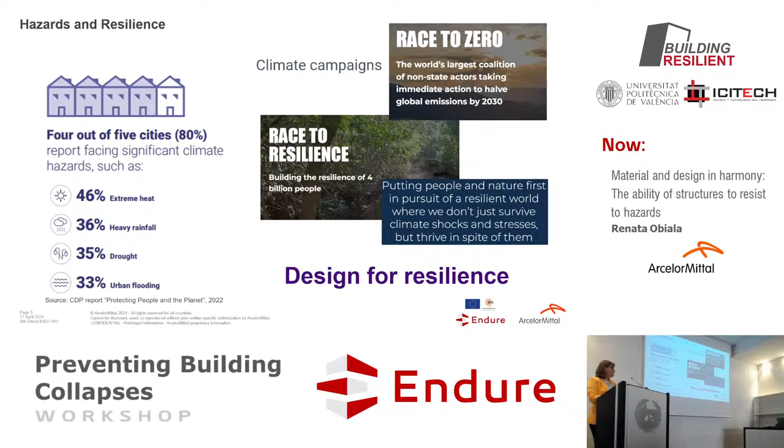So resilience, this we heard also from Mark, it's about a probabilistic approach. Is it a risk? No, it's something about managing this uncertainty. Of course, we don't know the time, we don't know the intensity of the events, and we predict it to some extent, but very little. But maybe we can predict how the structure behaves. That's what we as engineers like to have - we have it under control. So here we can have a bit more control of what's happening, thanks to all the research that is going on and that happened before, which has had an enormous impact on our ability to predict the performance of structures.

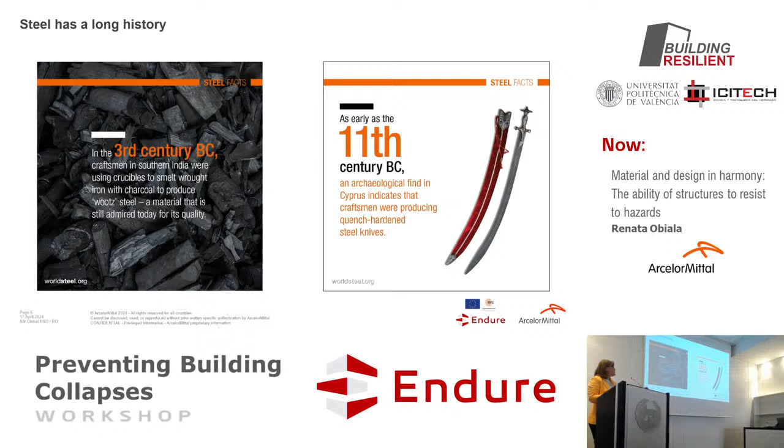Here I think nobody will be surprised that I move a bit to material and focus more on steel. Steel as a material is known for centuries all over the world. I give you a few examples of what has been found, three centuries before Christ, eleven centuries before Christ, but all this steel was not used for construction, for a lot of different uses, but not for construction. When things changed is when it was possible to remove all the impurities from the material, industrialize the process, and basically produce it in sufficient volume to introduce it in construction, also having the right quality for it.

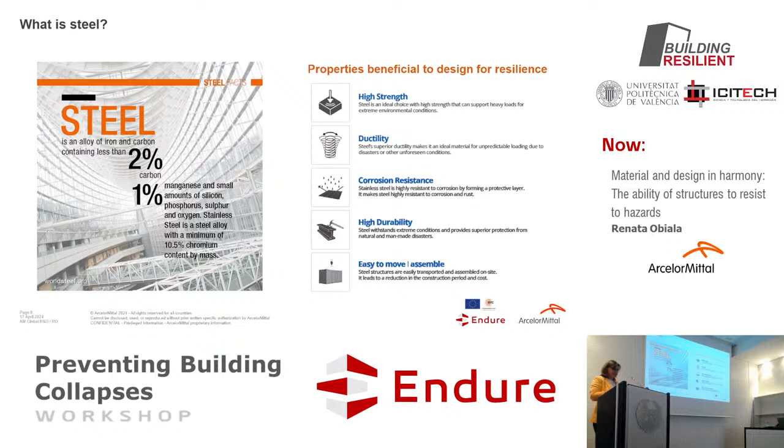Okay, let's focus a bit on high strength steel. Why is it important here in this aspect of resilience or improving performance of structures? It's important because we can, keeping the same weight, increase the resistance, which means we don't need to make the building heavier. We can use higher quality steel, keep the same weight, and have higher resistance. In the other way, if we want to reduce the weight, we can also optimize it.

That's about high strength steel. And now I would like to move a bit to the examples and solutions, how we can use it for different aspects related to robustness, to resilience, to hazard.

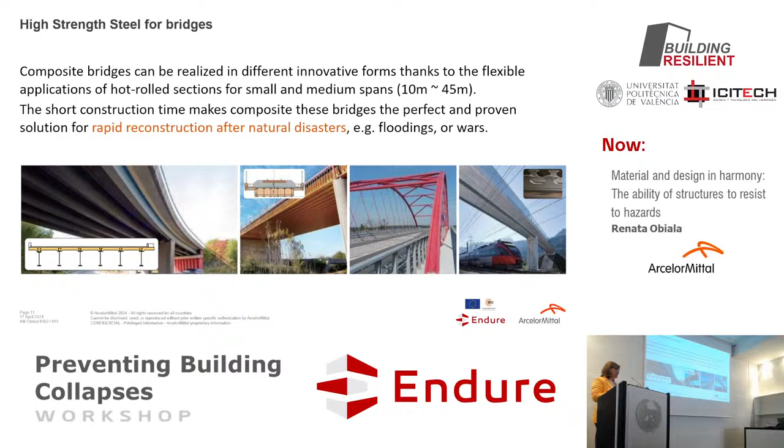These bridges, even though bridges in general are considered very monumental structures, we have very few all over the world which are very long span and monumental. Most of the bridges we have are medium short span, 10 to 45 meters, so they are simply practical. They are fast for reconstruction after natural disaster, after flooding, and can be very quickly built. This bridge can be made as a modular bridge. We have examples where the bridge was installed for railway application overnight, because that was the only way to stop the trains running. So in one night, the bridge had to be there, functional and fully made.

Again about the bridges, it's not a secret that fatigue is something which drives the design. Here we were testing new hangers for the tied arch bridges, using high strength steel with very thick sections we call jumbos. You can see here a colleague finishing some element for the testing. It's a really big section, and we had to test this part for fatigue.

The performance was surprisingly good - well, it's the right word to say surprisingly. It was very good, it exceeded several times the requirements of the standards. So we can say we have extra capacity here. The bridge can last longer. Of course it has to be monitored, has to be proven, but in principle it can last longer than the design lifetime, which is what we really want.

It was also done numerically. Here is maybe worth mentioning a machine for fatigue testing called Chronos, which allows us to test very big specimens, used very often for offshore applications, where these fatigue aspects are also very important.

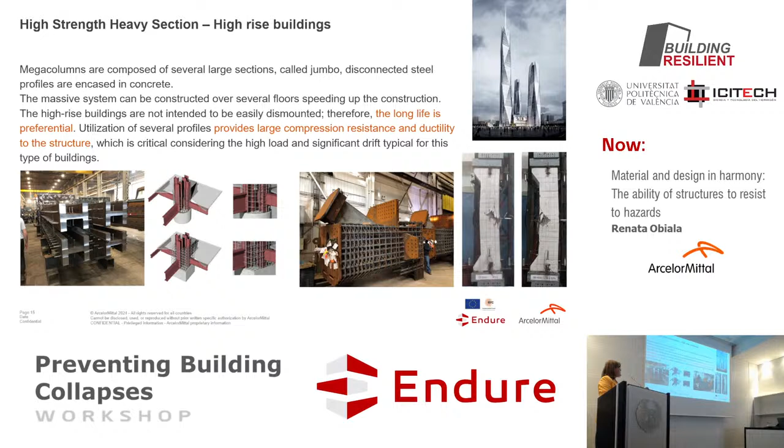Staying with buildings, this time with seismic application - I think I can skip this solution since it was already mentioned a few times. It's also a solution developed in collaboration with the University in Liège to ensure that failure occurs in the beam, not in the column.

So what has been proposed is to give a bit more ductility to this solution by inserting steel inside the column at the bottom floor. It's also to avoid the punch effect - the steel goes a bit above the slab. That's to avoid the failure, the progressive collapse of this kind of building.

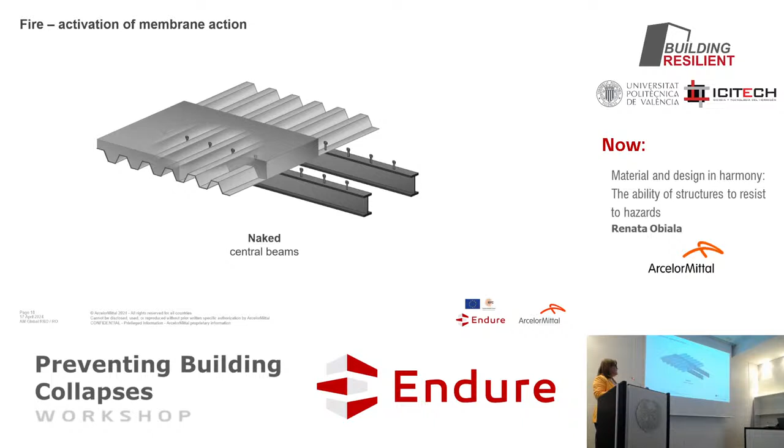Then we have reinforced concrete slab, or slab with steel decking. Important is that the design of the reinforcement is a bit more than for normal design, and all the beams around the perimeter of the compartment or cell are fire protected.

So what's happening when we have the fire? The beams around, which are fire protected, are not deforming much, but the beams in the center without fire protection, with time, basically totally lose their capacity, their bearing strength. So what we have here is basically development of catenary action. We have a failure which leads to an increase of capacity. It's a bit bizarre, but that's what is happening.

We are losing the beams, we are activating the slab. What is very important is the level of reinforcement in the slab, so it can create the tension ring and membrane effect. For this system, there is also software available to help design this kind of thing. Commercially applying the system, we allow for a reduction of 30% of the fire protection, basically reducing the cost of the structure without compromising on safety.

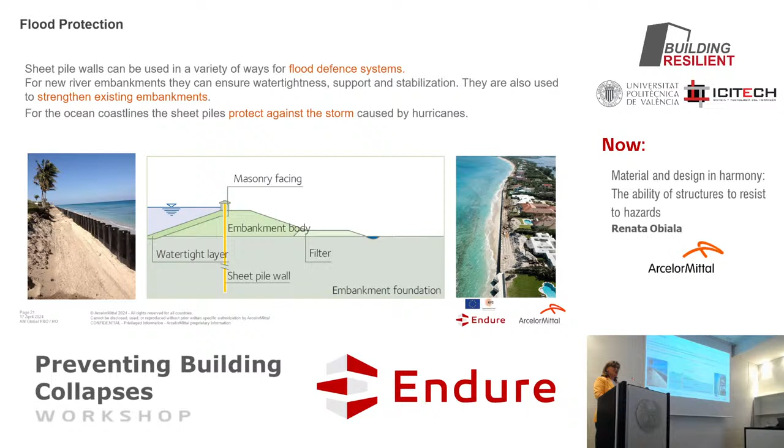So this is a test done in the Netherlands, funded by a national research fund. You can see a row of sheet piles here. Behind the sheet piles is a lake, and these containers create additional load. With the additional load put behind the scene, the whole wall is expanding but not breaking. It has enormous ductility thanks to the material, but also thanks to the geometry, so these systems prevent failure of the whole dam, of the whole protection wall.

Here also a lot of measurements have been done, and the processing of this is a lifetime job, but we have a nice video that makes the first good impression. At the end of the presentation, I'd like to come back to the bridges.

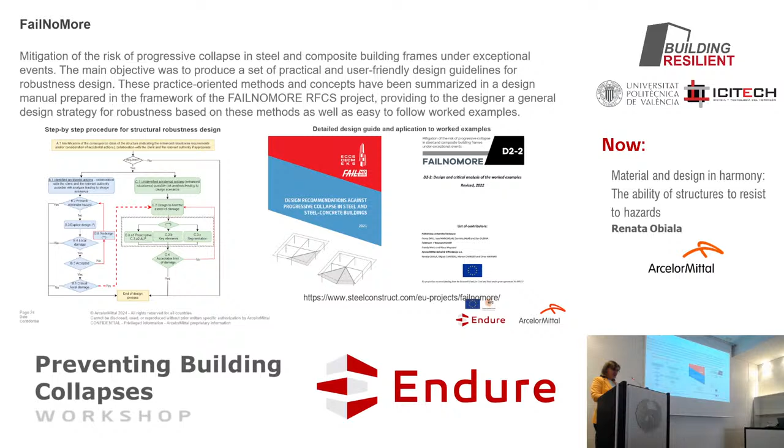And I think that leads me to the final slide, to the summary. With all the failures that I showed before, all the hazards at the end, we want to have solutions, and we are on the good way to have them. Just to summarize: resilience, managing and preventing hazard is very important for society, for all of us. Research in this field is very important, as health and safety is a global priority for all.

Material and design have to work together to provide an efficient solution. Steel is a modern product, not only material, and highly reusable and recycled. Steel provides solutions to hazard, to resist hazard and save lives. As I said, I focus on steel, but we cannot live without other materials.

It's like the example with fire - when the steel fails, we rely on the slab. So we need to use all the materials we have, and the best features each material has, in a wise way. And that's it. Thank you very much.

The most important message: as engineers, we can contribute to the safety of our environment, our living and working environment. You see, the most important - I would have missed it, so now you will not forget it. Thank you very much.

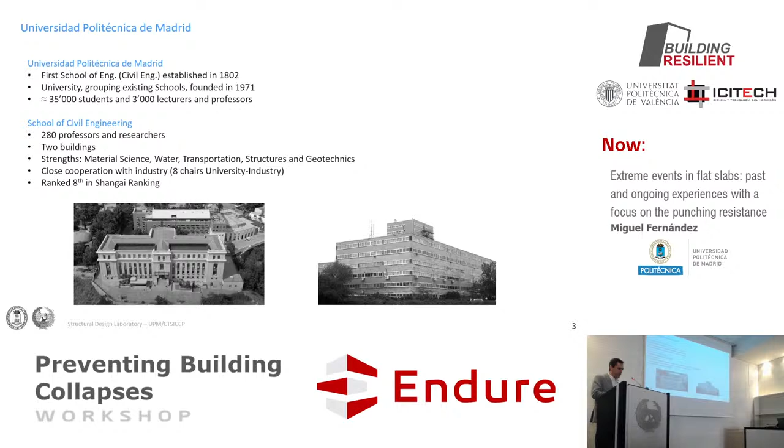In Madrid we are developing something very nice: we are working closely with industry, not only academia working in isolation. I think this is one of our strengths, and this is why we appear quite high in these rankings. We are currently eighth in the Shanghai ranking, so in Europe after Zurich and Copenhagen. And we take advantage of some large experimental facilities, which you will see why we present later.

I really think testing is a good way of advancing knowledge, pretty much like Sarah was showing. We could test, and we will see later, real buildings in the lab, also removing columns, but large size specimens. That test was not by me, that was a test by Alejandro Pérez Caldentey.

We also have devices for impact loading. This is also not a test of mine, this is Carlos Zanuy and Gonzalo's tests, but we are equipped also for testing in case of extreme events.

We have now completed the building of some peculiar experimental facilities. This is what we call the multi-axial structural tester, which we have finished right now, which allows quite large elements, such as a slab, by putting membrane action, up to 2 meganewtons in the horizontal direction and 5 meganewtons in the vertical one. This is aimed at testing really at the structural level what's happening in reality.

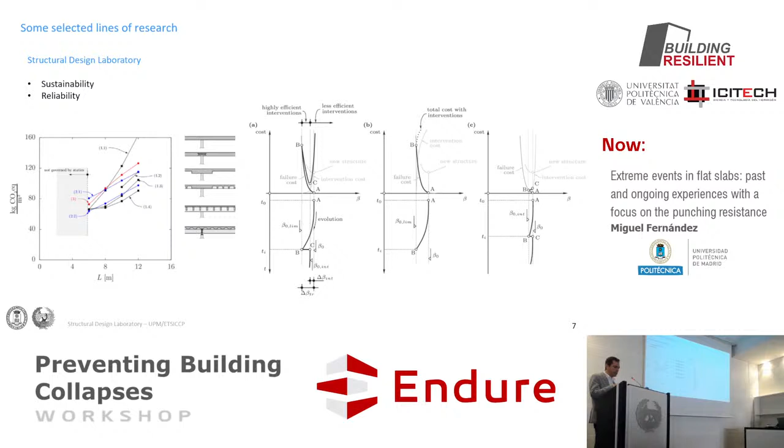Also, we are very active on reliability, Mark, so this one goes to you. We have been basically in Madrid discussing what's the good value for beta, what level of reliability we have to adopt, not only for new structures but mainly for existing ones. What to do with our existing structures - this is a topic I will come back to with an image at the very end.

It came not from creep tests, but from when I saw some low cycle fatigue tests. Not that they were doing low cycle fatigue tests, but I saw that failure was happening when they touched the monotonic failure envelope.

And I said, okay, that's the propagation of cracks inside, and then is there a link with creep? And that's where the idea actually came from. These models, we can implement them. This is the thesis of Rafael Ruiz, and now we're testing these elements. And the idea is always to apply them at a structural level.

And we are also working on limit analysis, strut and tie models. This is something that I work closely with Jaime Mata, who is also in this audience. And we are working in FIB, working party 2 to 4.

And finally, this is the topic that I will develop now. This is the flat slab response. And we will be seeing some topics on resilience, but I'm very much interested in real size testing.

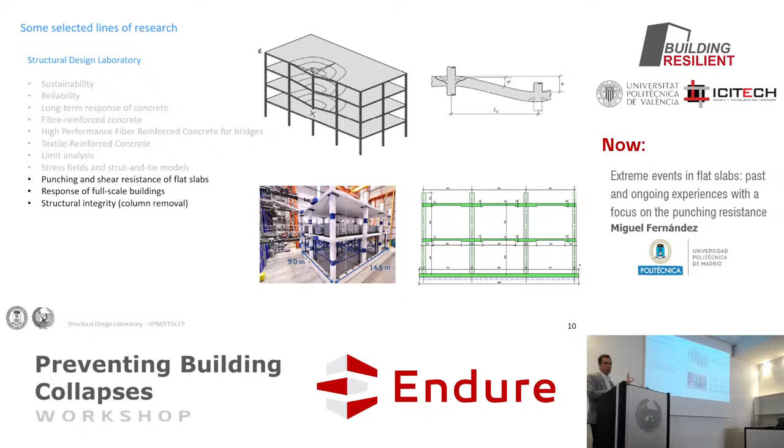So yeah, this is a bit, as you see, having an overview is very wide, and I think that's good because it helps understanding what we are going to see now more in detail with respect to the topic on extreme events in flat slabs.

And as also many others, I have to acknowledge that this is never one-man work. So I'm working at Polytechnica, and this is something I'm doing in close cooperation with the University of Surrey, with Juan Sagaseta. I know that here there is a close link also with him, particularly with a postdoc working now with Juan, which is Maria Liapopoulou. And we are developing and extending some previous models that we will try to clarify now.

So why is this topic important? As Sarah was showing in one of the videos, I think it's very important to note that when we have a flat slab and there is a column removal, the most probable mode of failure would be punching. Punching is normally governing at the ultimate limit state.

Serviceability must be deflections. But when we have a column removal, we have increases of the shear demand in inner columns and also in lateral columns. And also we have increase of rotations, we have increase of the level of strain that we are having. And this makes that the columns are prone to punching.

So punching is this, when we are developing these inclined cracks inside the concrete, and it happens in a phenomenon that what we call localization of strain. So the strains, they are localizing within what we call a critical shear crack. And this critical crack is going to rule the strength.

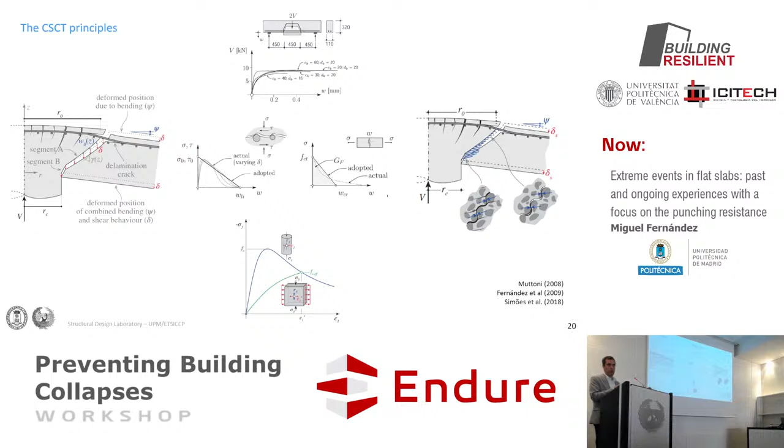By the way, you can solve this numerically. These are instances of numerical solutions for different cases, and you can see that when this is associated, psi is associated to rotations. The larger the rotations, the more the cracks open, you transfer less through aggregate interlock on top, and everything concentrates on the bottom. However, when you have small levels of rotation, small levels of deformation, cracks are not that open, and then you can mobilize this transfer of shear stresses through larger regions. And this is consistent with what we were seeing before, that the lowest the deformation, the higher the resistance you could have.

And this idea actually is - we would say, okay, this is a critical shear crack, and we may go. But there's a sentence I like very much that says doing a complex model is very simple, and doing a simple model is very complex. So here, this is what could be the complex model, which is not very simple to do, but in fact, yes, it's just putting material parameters and getting it. This is what would be the complex formulation.

But I think a brilliant idea was to make a simple model from all this. So how do we simplify this into something that we can use in a practical manner? And this idea was an original work by Professor Muttoni. By the way, that idea of how it could be calculated.

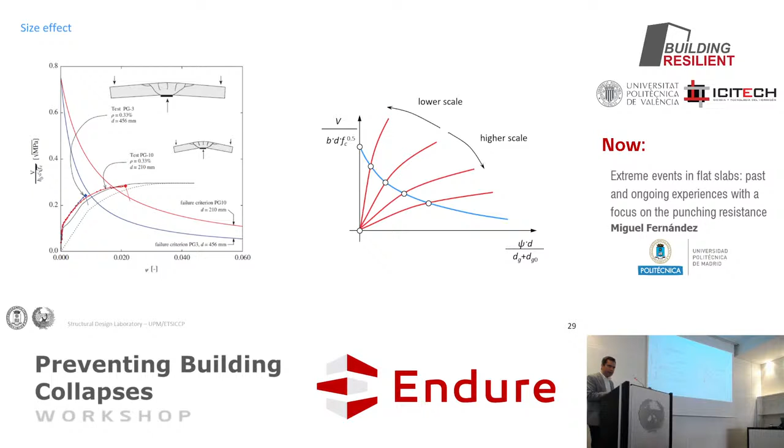And this, without plugging any coefficient, without doing any trick, you can express this in terms of a double log scale, and then you get what is normally called not only the size effect factor, but the full size effect law, as described, for instance, by Bazant.

And so, depending upon your considerations, it may vary a bit. So, for instance, for the parabola, what you're getting is this decay. It goes up to a limit, which is the strength criterion. This point here cannot be higher than this point. But when you have larger sizes, it decreases, about a slope of 1 to 3. This is basically it.

Interestingly, when you're getting this relation, which is the bilinear law, if you are failing within the linear part of the response, you're getting a slope of 1/2. 1/2, as you may typically know, is the slope that linear elastic fracture mechanics gives you. And this is because it is linear elastic. So if you assume a linear elastic response of the member, you will get the slope of linear elastic fracture mechanics, while these milder slopes are associated with some level of nonlinearity: cracks, plasticity, yielding regions, and tension stiffening effects and so on. So it's a very consistent theory, and as I was stating, you can use it at different levels.

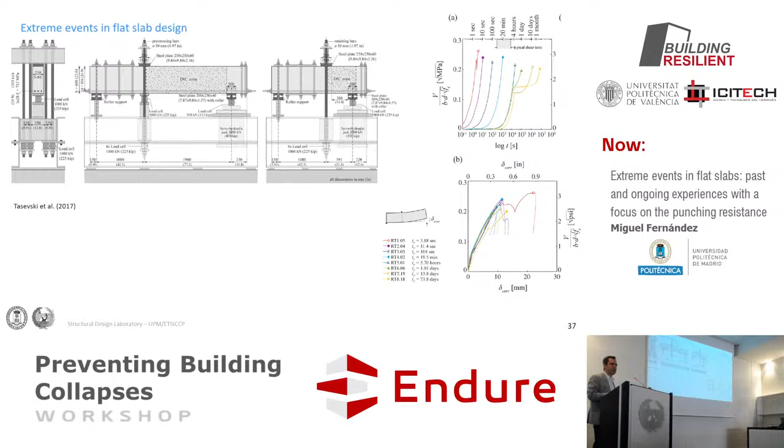There was perhaps a bit of decrease, but even you may say, yes, but for 1 second it raises, Miguel. No, it raises, but not necessarily. There was a first failure, and then it dropped, and then we were capable of reloading it. And in fact, the first failure was about the same. And I was going to say, okay, so are the materials changing so dramatically that you see something, or what's happening? No, in fact, not at all. That was a very interesting conclusion for me, that the change that may explain why this is a bit higher or there are reductions is not in the material itself. The difference is in the shape of the cracks.

And then you see it here. This is a very fast loading, and this is the shape of the critical crack, which is that one. And as you see, it is very low. While when we are doing long-term loading, but even some days or some hours, what you see is that the critical shear crack is not that one. The critical shear crack is starting far away, and it's rather consistent. So the critical shear crack is shifting. And so while here you could, after first crack, still have a direct strut, then you cannot have it in the other cases. So what was changing, in fact, was not the material properties. The changes in the strength that were observed were basically due to the difference in the shape of the crack, in the kinematics of the crack.

But we saw very consistent results to Sarah, by the way, because we were not capable of breaking any, in long term, any of the beams that we had, and so we needed to reload them, as you were doing also, in order to reach failure. And we saw, I think also consistently to what you were saying, that failure was in fact triggered in some seconds at the very end. So it doesn't matter what was happening here, almost nothing. It was just the very end minutes that everything was triggered and leading to failure.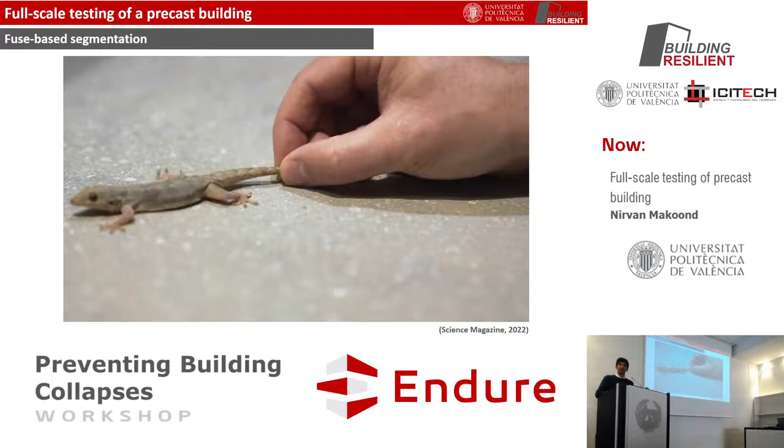As Andri mentioned, the main idea behind fuse-based segmentation is a design approach which involves ensuring continuity for operational conditions or small initial failures. But when large initial failures occur, for which collapse initiation is inevitable, the approach ensures that collapse is arrested by controlling the hierarchy of failures that occurs. And the lizard analogy is a very good one for the approach, in my opinion.

The concept of fuse-based segmentation makes an important distinction between two types of initial failures: small initial failures, for which it is possible to prevent collapse initiation through load redistribution, and large initial failures, for which collapse initiation is inevitable. From now on, I will refer to these as either small initial failures or large initial failures - these are the definitions for these two types of failures, which are not universal.

To investigate and test the applicability of this design approach in a real building, we devised a design problem. We chose a precast building because it's being increasingly used for high occupancy buildings in this part of the world, for malls and hospitals, for instance. The building specimen consists of a 12 by 15 meter building with two floors of 2.6 meters. This represents a building which could be feasibly tested at full scale, while also employing construction techniques which are still common and useful for industry.

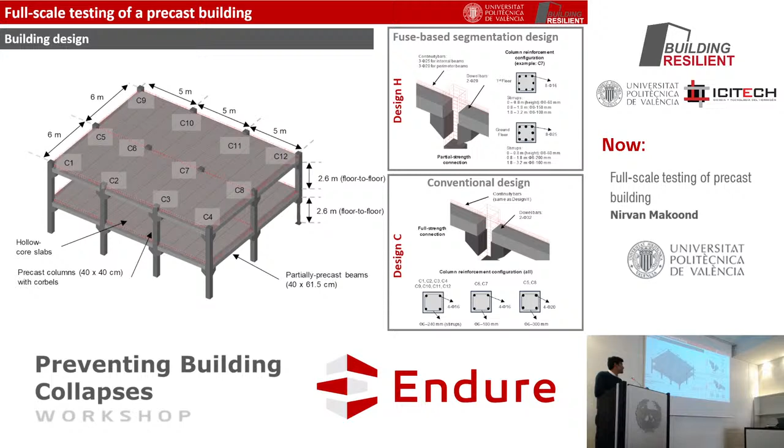Here I've shown again some of the details of the partial strength connections which allowed this to happen. As we can see, both design H and design C had three continuity bars going through the prepared sleeves in the precast columns. And in the case of design H, the dowel bars were designed specifically so that failure would happen before the column reinforcement.

We performed some simulations for fine tuning the designs, and here we see the result after an extreme small initial failure, one for which load redistribution could still avoid the initiation of collapse. On the left I've shown the principal normal strains in the case of the fuse-based segmented design, and to the right, the conventional design. As we could expect, the fuse-based segmentation design is slightly more strained for this case, whereas the conventional design with more continuity is less strained for this situation because it distributes the load better.

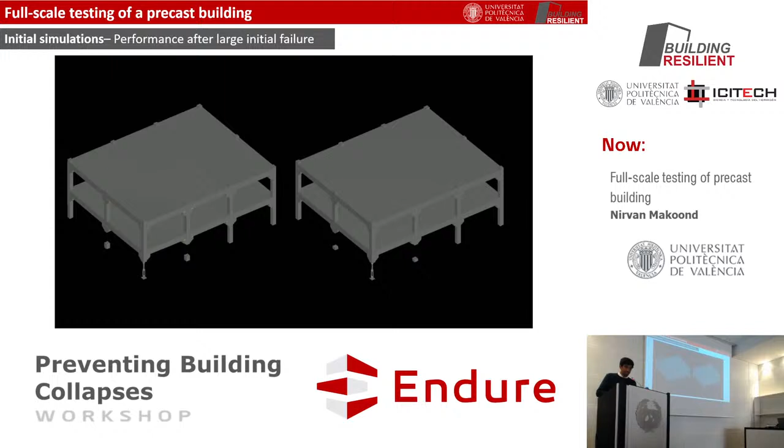However, after a large initial failure involving the removal of the three edge columns supporting this corner bay, here we have the fuse-based segmentation design, which only results in partial collapse, whereas the conventional design leads to total collapse in this case.

So these initial results gave us an indication that fuse-based segmentation could be valid for this type of structure, and it allowed us, with these results, to proceed to the building construction.

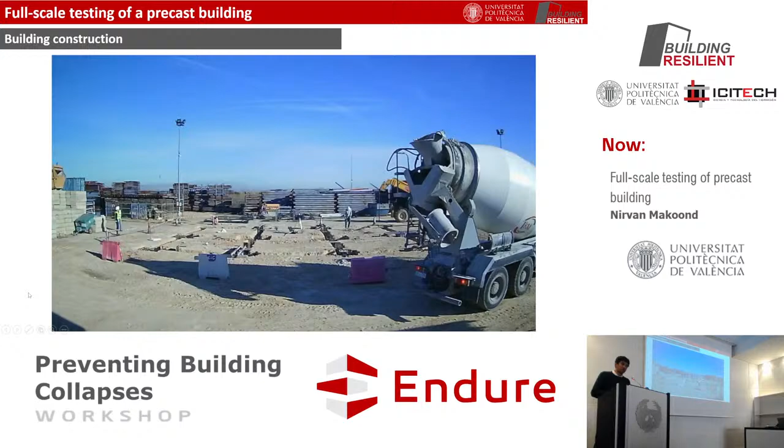Here this is showing the construction process. First, the foundations were laid, the precast columns were erected, and the precast part of the beams were positioned on top of them. Then the hollow core planks were positioned over the beams, and finally the topping was poured on top, which completed the hollow core slab, and also the cast in place portion of the beam.

So then we evaluated different initial failure scenarios to decide the final testing scenario we would evaluate. We evaluated three different scenarios. Basically, we considered three different scenarios.

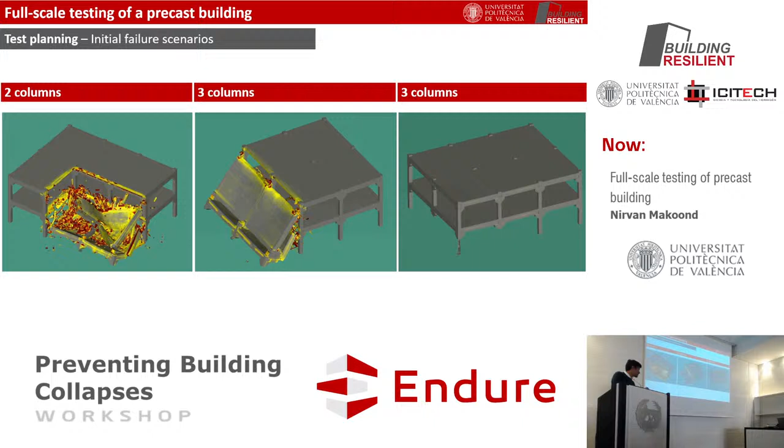The first one consists of two columns removed in this part of the structure, and basically it would cause segmentation along a single line of failure, so unidirectional segmentation. The third one, which was the one we finally chose, involved the removal of these three columns and a corner bay.

So we chose it because it gave us the best margins with respect to the amount of load needed to initiate the collapse, and also the safety while loading the structure. But also from the scientific point of view, it was more interesting to have failure along two planes to really test how well the segmentation approach was working.

Also, our approach we were able to test it at least theoretically very well based on the connection of the beams and the columns. But we did always have some slight uncertainty based on the topping reinforcement in the other direction as to how that would behave. So we were keen to test it.

Okay, so here I've just summarized a bit how we planned to execute the test.

The test was to be executed in two phases. In the first phase, we planned to remove quasi-statically the first, so two penultimate columns, using this apparatus that was prepared, involving a hydraulic jack that could be gradually lowered. The second phase of testing would involve dynamically removing the corner column.

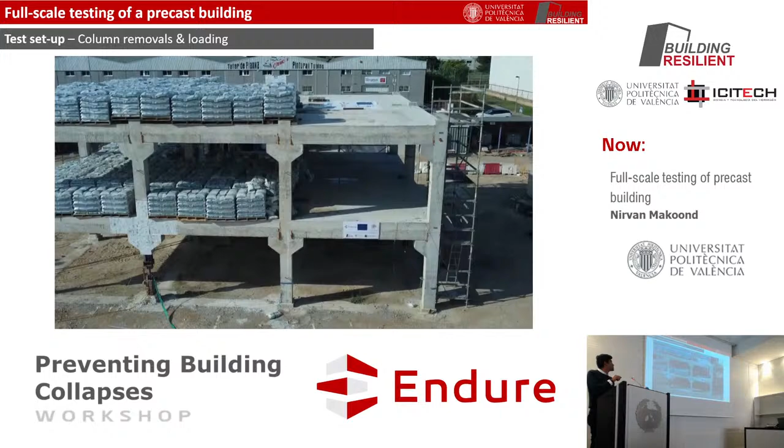We loaded the structure only partially, because we performed several simulations to compare what we could expect the difference to be between partial loading and fully loading the structure. We expected it to be quite similar. However, in the case of partial loading, the drifts in the part of the structure we expected to remain upright were larger, and therefore there was a greater unbalanced moment being transferred to that part of the structure.

The columns also had a lower level of compression. So this case was more critical for the upright part of the structure, and therefore it was of interest for us to test that it could resist the pulling forces as we expected.

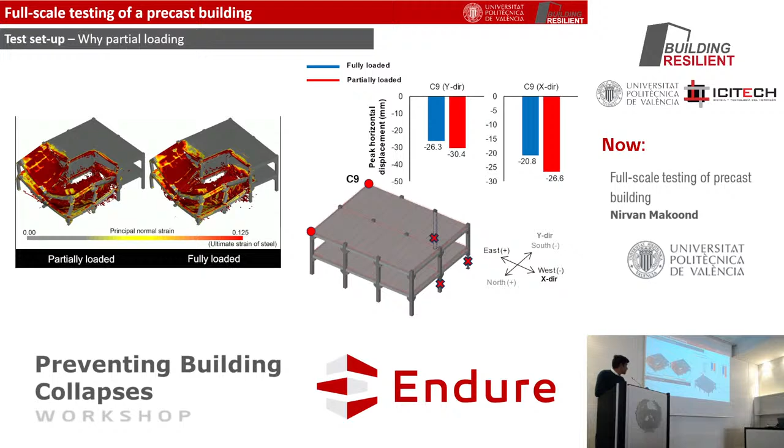Okay, so for the test, we monitored the structure extensively, to calibrate our results and our simulations, but especially to better understand how the segmentation was occurring along the segment borders, and to verify the damage in the intact part of the structure. We used 57 embedded strain gauges connected at different parts of the structure, displacement transducers to measure horizontal displacement, and accelerometers.

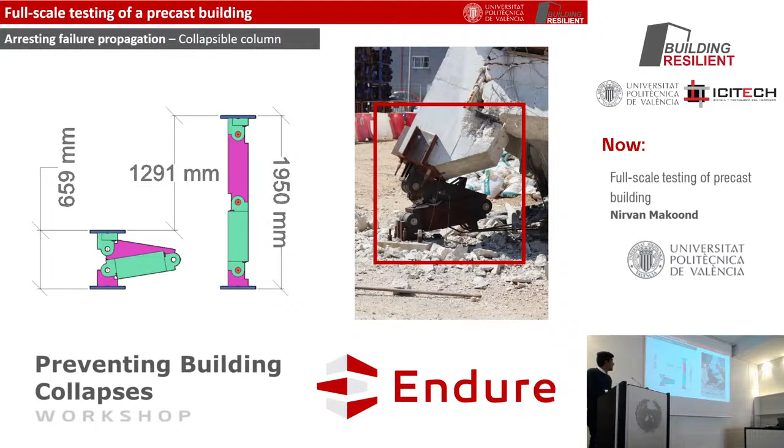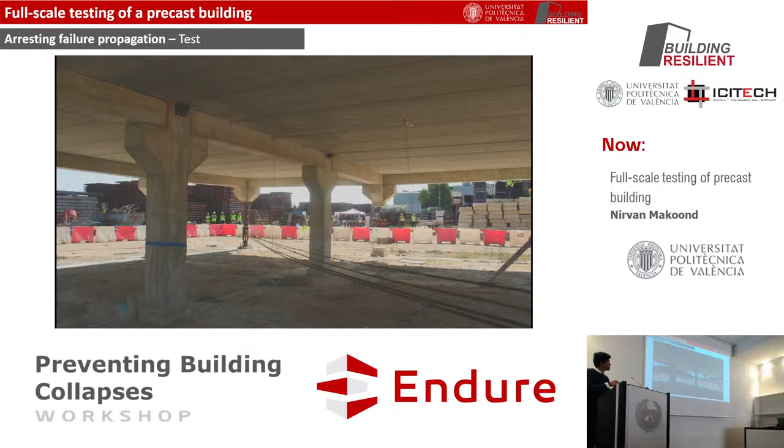Prior to testing the second phase, the middle hinge was locked, and it was unlocked from a distance, then given a slight destabilization to activate the sudden removal of the column, which is what we see in this video showing the collapse part of the structure. As we can see, the failure of the partial strength connections occurred, and the rupture of the continuity bars at that connection occurred prior to any failure of columns, creating a segment border between the columns just outside the influence area of this initial failure.

And here, basically, these are some of the interesting results we were able to collect. As we can see, only the influence area of the initial part collapsed, and basically here the connections failed, and along all the slab there was debonding of the reinforcement.

It kept on moving in that direction, but shortly after the failure of the connection around C7, there is a backward recoil, which shows a tugging effect. Then the movement of the remaining part of the structure went into an attenuating oscillatory motion until it stabilized with a notable residual drift.

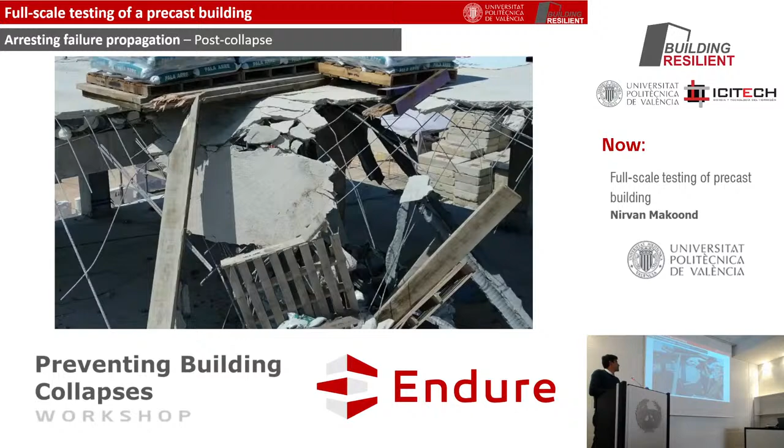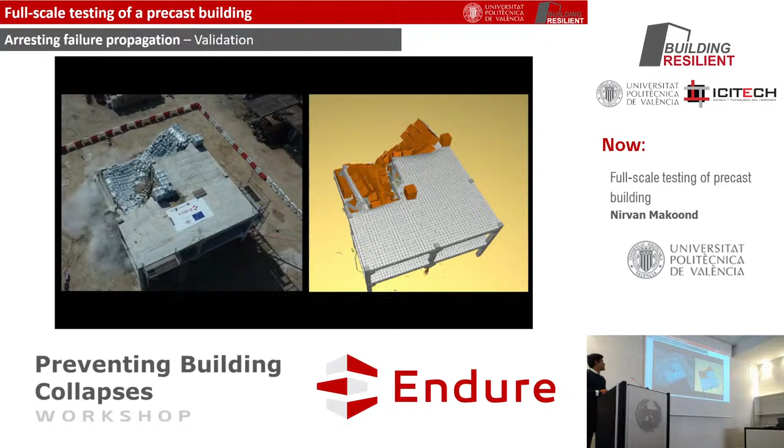So the simulations we performed to plan out the tests also turned out to predict very well the actual observed structural response, and the assumptions we had to make were reasonable, all based on quite theoretical assumptions we could make before.

So this brings me to the conclusion. The test showed that the design complies with robustness requirements in building codes. We could see that in phase 1 of testing. Collapse could be arrested after a large initial failure, which is what we saw in phase 2. We also showed that more conventional robustness design would have led to total collapse for the same large initial failure. There was some damage suffered in the upright building segment, but safe evacuation and rescue would still be possible.